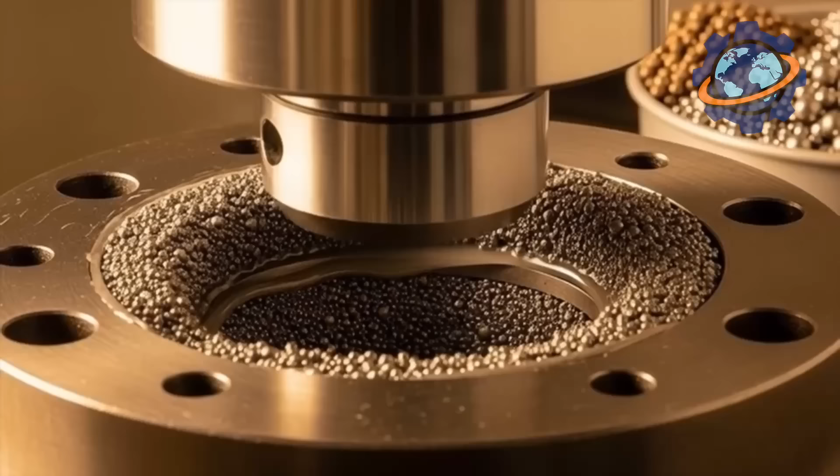Hold a 1-inch tungsten cube. It weighs nearly 1 pound, denser than gold, heavier than lead. Drop it and the floor dents, not the cube. This metal refuses to melt until 6,192 degrees, hotter than Earth's core, beyond temperatures where other metals vaporize.

Light bulb filaments, armor-piercing bullets, rocket nozzles: tungsten survives conditions that destroy everything else. Yet it starts as dull gray rock, looking worthless. How does brittle ore transform into metal that won't surrender? Why does one nation control 70% of global supply?

Stay with us. You'll witness industrial-scale mining reshaping mountains and discover tungsten's shocking secret. This indestructible metal is so brittle in pure form it shatters like glass.

The Dayu tungsten mine in Jiangxi, China dominates the landscape. An open pit 3 miles across, descending 800 feet into the earth. Giant haul trucks, each carrying 400 tons, crawl spiral roads looking like toys from the rim's edge.

This single mine produces 40,000 tons of tungsten concentrate annually, enough to manufacture 2 billion light bulbs. 70% of the world's tungsten comes from Chinese operations like this.

Watch the blast sequence. Drillers bore holes 50 feet deep in geometric patterns across the pit floor. Each hole gets packed with explosives, 200 pounds per hole, hundreds of holes per blast. The detonation ripples across the face in sequence, fracturing 10,000 tons of rock in 30 seconds.

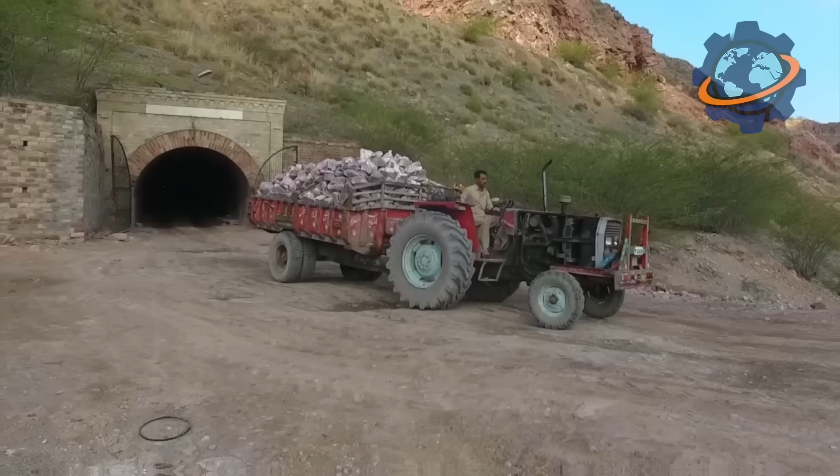Dust clouds billow 300 feet high, visible from orbit. What took nature millions of years to create, humans demolish in half a minute. The ore, wolframite and scheelite, contains just 0.5% tungsten. That means 99.5% is waste requiring removal.

Massive crushers reduce boulders to gravel. Ball mills grind further. Rotating drums containing steel balls pulverize ore to powder finer than flour. The grinding noise is deafening, continuous thunder as metal crushes rock.

Separation uses gravity and magnetism. Wolframite, being dense and magnetic, concentrates easily. Scheelite requires froth flotation. Chemicals make tungsten minerals hydrophobic, clinging to bubbles while waste sinks. The concentrate, now 15% tungsten, ships to processing plants.

China's dominance isn't accidental. They control reserves, processing knowledge, and critically tolerate environmental damage Western nations won't accept. Tailings ponds stretch miles, filled with chemical-laced sludge that'll remain toxic for centuries.

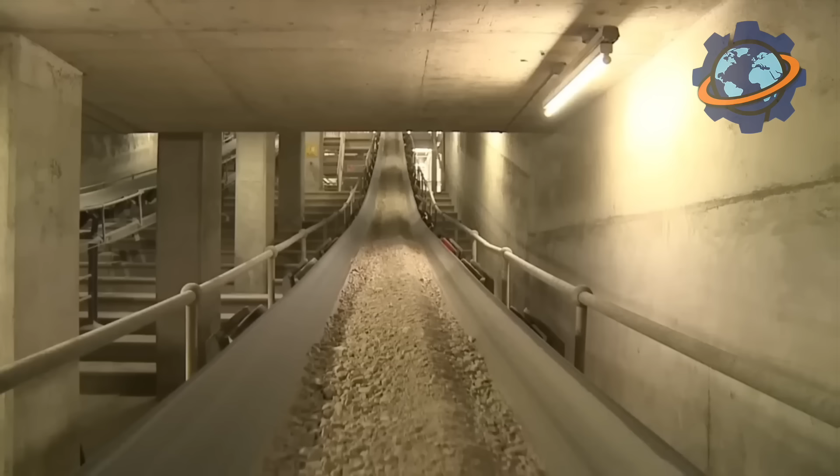Processing concentrate into pure tungsten trioxide requires acid digestion. The concentrate gets dissolved in hydrochloric or nitric acid, a violent chemical attack breaking molecular bonds. Tungsten dissolves while impurities precipitate out. The solution, now containing tungsten compounds, undergoes pH adjustment, causing yellow tungsten trioxide powder to crystallize.

This powder undergoes hydrogen reduction, the crucial transformation. Inside tube furnaces heated to 1,800 degrees, hydrogen gas flows over tungsten trioxide. The hydrogen strips oxygen atoms, leaving metallic tungsten powder.

But here's the challenge. Pure tungsten powder is useless. The particles don't bond. Press them together and they crumble. Tungsten's ultra-high melting point makes conventional melting impossible. No crucible survives the temperatures required. The solution? Powder metallurgy.

Powder metallurgy bypasses melting through sintering. Particles fuse below melting point under pressure and heat. Tungsten powder gets pressed into desired shapes using hydraulic presses generating 50,000 psi. The compacts, called green bodies, are fragile; handle them roughly and they disintegrate.

The green bodies enter sintering furnaces operating at 4,500 degrees in a hydrogen atmosphere. At these temperatures, tungsten atoms migrate across particle surfaces, welding together without liquefying. The process takes 12 hours. What emerges has transformed. The powder compact becomes solid metal with 99% density.

Dimensional changes are predictable but significant. Parts shrink 18% during sintering. Engineers must design oversized greens compensating for this shrinkage.

Pure tungsten remains problematic. It's brittle at room temperature, difficult to machine. The solution? Alloying. Adding 2% thorium or lanthanum dramatically improves workability. These elements prevent grain growth during sintering, creating a fine-grained structure that machines more easily.

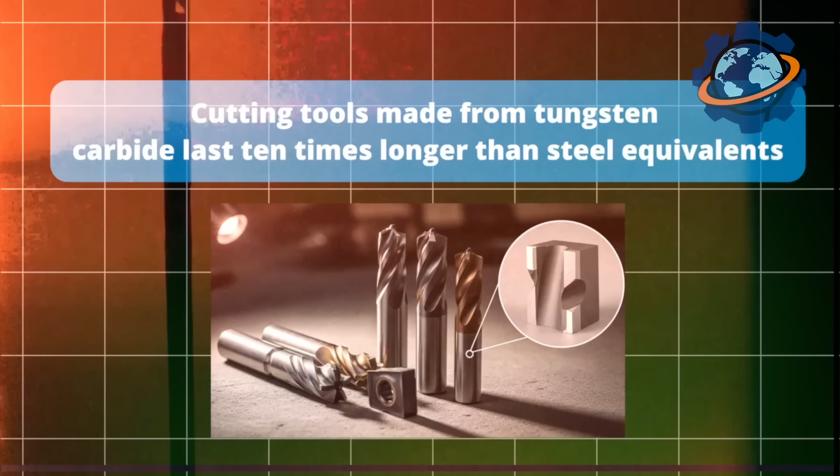The most common tungsten product worldwide is tungsten carbide, tungsten powder mixed with carbon, sintered together. Tungsten carbide achieves hardness second only to diamond. Cutting tools made from tungsten carbide last 10 times longer than steel equivalents. Mining drill bits, machining inserts, industrial dies: anywhere extreme wear occurs, tungsten carbide dominates.

The material cuts steel like butter but shatters under impact. Drop a tungsten carbide block on concrete and it explodes into fragments. The combination of extreme hardness and extreme brittleness defines tungsten's paradox.

Wire drawing demonstrates tungsten's remarkable properties. The sintered tungsten gets heated to 3,000 degrees and drawn through progressively smaller diamond dies. The wire diameter reduces from 1/4 inch to thousandths of an inch, thinner than human hair, for light bulb filaments. This drawing process work hardens tungsten, increasing strength.

Modern LED lights made tungsten obsolete for household illumination, but specialty applications remain. Electron microscopes, X-ray tubes, high-temperature furnace elements. Anywhere electricity must flow through extreme heat, tungsten wire delivers. The element's resistance increases with temperature, making it self-regulating. In light bulbs, the hot filament resists current flow, limiting power draw and preventing burnout from voltage spikes.

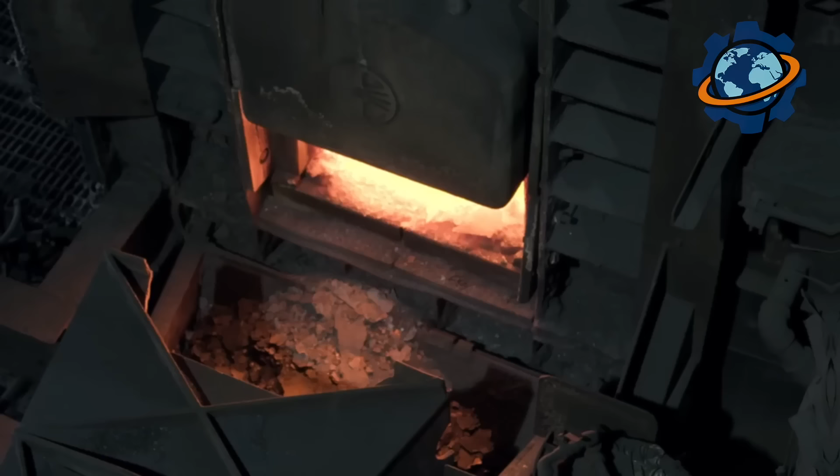The ethical controversy is intense. Depleted uranium performs similarly but raises radioactivity concerns. Tungsten offers equivalent performance without radiation, but mining's environmental cost is staggering. Each ton of tungsten requires processing 200 tons of ore, generating mountains of toxic waste. The metal that survives Earth's most extreme conditions is extracted through processes poisoning the planet.

Swedish chemist Carl Scheele identified tungsten oxide in 1781, studying the mineral scheelite. Spanish brothers Juan and Fausto Elhuyar isolated metallic tungsten 2 years later. The name derives from Swedish tung sten, heavy stone. For a century, tungsten remained a laboratory curiosity. Everything changed when Thomas Edison needed light bulb filaments in 1879. He initially used carbon, which burned out quickly. By 1904, manufacturers switched to tungsten, revolutionizing electric lighting.

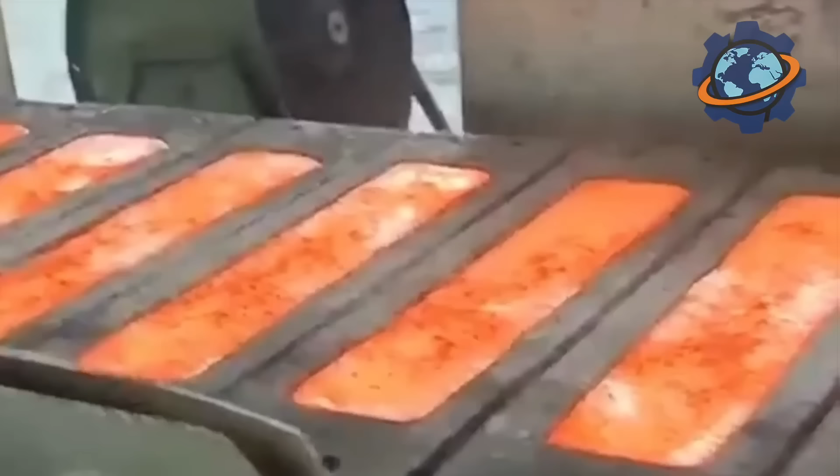World War I revealed tungsten's military value. High-speed steel cutting tools containing tungsten enabled mass production of weapons. Today's annual production exceeds 90,000 tons, with China dominating supply chains so completely that Western nations consider tungsten a strategic vulnerability. Carbon emissions remain problematic as tungsten production generates 8 tons of CO2 per ton of metal, primarily from energy-intensive processing. Recycling exists but remains limited. Only 30% of tungsten gets recycled, far below rates for aluminum or steel.

Here's the secret we promised. Tungsten's incredible strength comes from its weakness. Pure tungsten is brittle, shattering easily. But that brittleness stems from its crystal structure. Atoms packed so tightly that dislocation movement, the mechanism allowing metals to deform, essentially stops. This atomic rigidity creates the highest melting point, extreme hardness, and resistance to deformation. The metal survives temperatures melting steel because its atoms simply refuse to move. Adding trace elements creates enough flexibility for workability while maintaining strength.

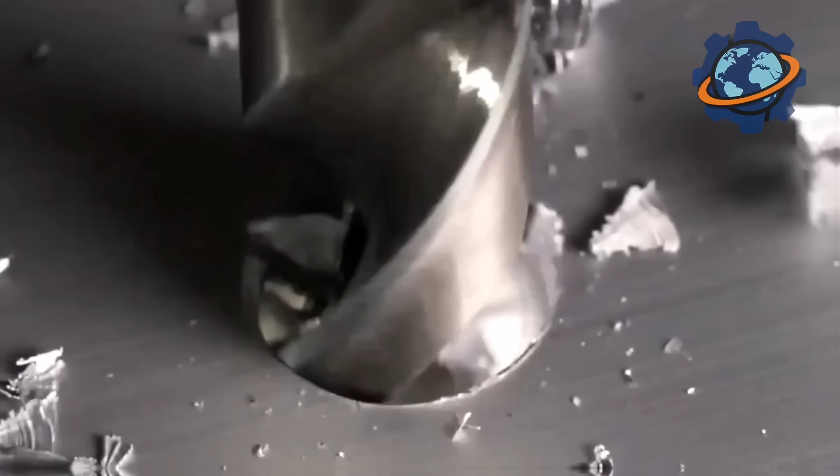From Chinese mountains to cutting edges worldwide, the transformation completes. We've mastered metal that defies conventional metallurgy, processing it through techniques developed when melting proved impossible. That drill bit cutting through rock, that filament glowing white-hot, that bullet piercing armor, all share tungsten's fundamental contradiction. The strongest metal is also the most fragile. The element that won't melt is useless without powder metallurgy. We've learned to work with nature's extremes by accepting, not fighting, inherent limitations. Tungsten doesn't compromise. Neither do the engineers who've learned to shape it.

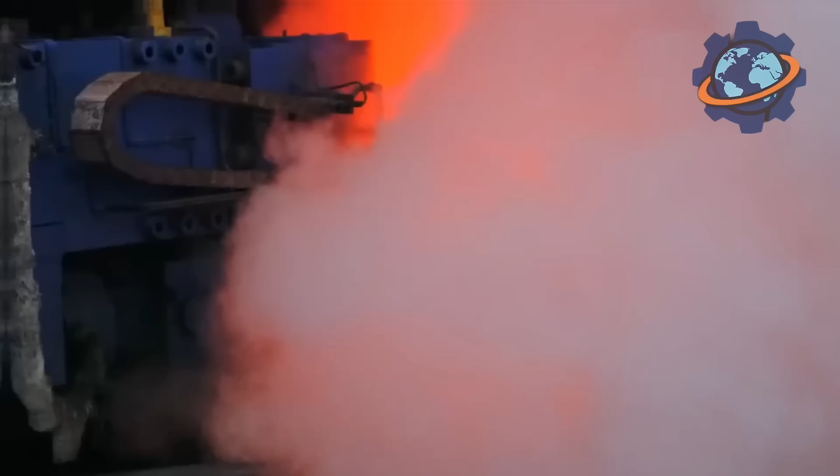Every year, hundreds of power units, bridges, and turbines are built worldwide. But there's one component almost nobody knows exists. How can a piece of metal over 50 feet in diameter be stronger than any welded structure? Why is it forged without a single seam, as if grown from a solid ingot? And how did this technology, created for nuclear reactors, suddenly start transforming wind energy, hydroelectric plants, and even the global heavy forgings market? Stick around till the end. I'll reveal the main secret of this giant ring that even many engineers don't know about.

To really get a sense of the scale here, picture a soccer field. The goal is over 23 feet wide. This ring's diameter, more than double that. You could easily fit multi-story buildings inside it, or a plane. And it's all one solid piece of stainless steel, not a single weld anywhere.

In the past, rings this size were made by welding together several large segments. Looked good, but those longitudinal seams always carried a hidden risk. Any micro crack, any welder's mistake, and during an earthquake or under long-term loads, that seam could become the weak point. Chinese metallurgists decided to go a different route. Don't glue it together, grow the ring from a single piece. They used a technique they call additive forging.

Here's how it works. Instead of trying to stretch a billet to the right size all at once, they forge it repeatedly in layers, gradually building up and rolling out the metal in the shape of a giant ring. Think of it like rolling out dough and folding it into a log multiple times to make it thick, even, and free of air pockets. Here, instead of dough, it's heated stainless steel and presses exerting thousands of tons of force.

First, they melt exceptionally high-grade steel with nickel, chromium, and molybdenum. These additives provide strength, ductility, and corrosion resistance, even in radioactive and high-temperature environments. The resulting ingot looks like a massive metal barrel. It's heated in furnaces where temperatures are many times higher than in a kitchen oven, then transferred to presses.

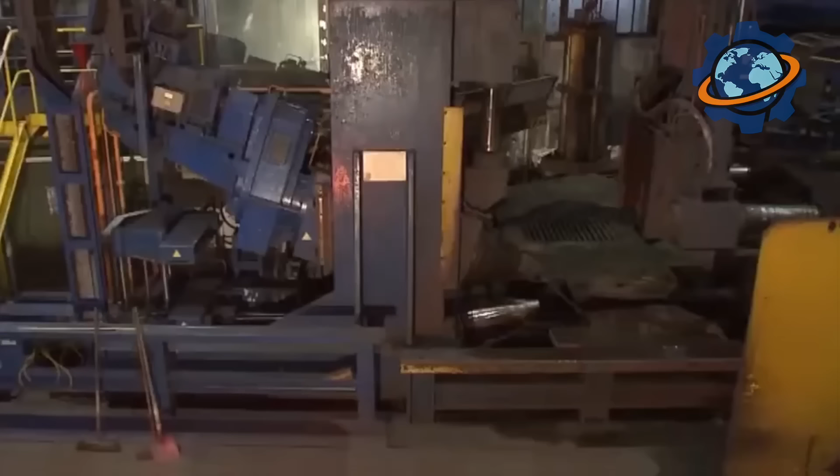The blank is first flattened, then pierced through, then rolled in a circle, each time rotating and hammering it so the structure becomes as uniform as possible. The incremental forging technique means the metal is constantly built up in the needed direction, while simultaneously being compacted, driving out voids and defects.

With each pass through the press, the ring grows in diameter, but its walls maintain the required thickness, and the steel's grain structure aligns. Engineers constantly monitor temperature, compression force, and deformation rate. If the metal cools too much, it becomes brittle and can crack. If it overheats, the structure flows and the steel loses strength.

So the entire operation is run like a complex recipe. Precise steps, holding times, checks at every stage. In the end, you have a solid ring without a single seam. This is critical for a nuclear reactor.

The support flange acts like a belt, holding together the vessel walls and all the internal guts, the reactor core, heat exchangers, internal structures. It bears not only 7,000 tons of weight, but also thermal deformations, vibrations, and possible seismic shocks.

Picture the reactor as a massive pressure cooker. This ring? It's the belt that can't budge, not even a micron. No weld seams means way less risk of cracks under cyclic loads, and it makes the whole thing tougher against earthquakes. Of course, forging isn't the end of the story.

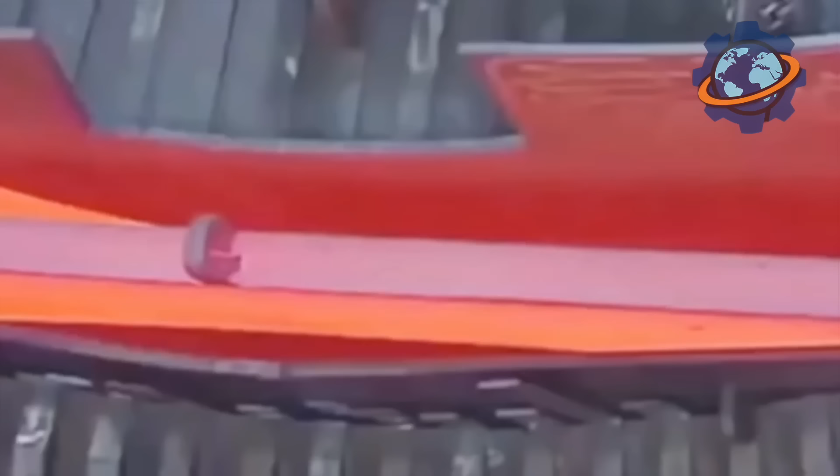The ring goes through heat treatment, heated and cooled on a precise schedule to lock in the steel's key properties: yield strength, impact toughness, resistance to creep at high temps.

Then come the endless checks: ultrasonic testing for hidden flaws, mechanical tests on samples sliced from machining allowances, hardness measurements around the whole perimeter. Only when engineers are confident the metal behaves identically at every single point does the part get cleared for duty in a nuclear unit.

What's really fascinating is that the breakthrough with this record-breaking ring didn't stay trapped in the nuclear club. The same idea of forging massive solid hoops started spreading to other industries. The hydro turbines at large hydroelectric plants have enormous ring-shaped components that hold the runners and guide vanes.

Wind turbine towers need powerful flanges that transfer loads from the blades through the nacelle to the steel column. The fewer welds in these critical parts, the better they handle vibrations and tough operating conditions. Additive forging technology makes it possible to produce large-diameter, solid rings for them that last longer and perform more reliably.

The world's most powerful open-die forging presses, including those at China Erzhong, reach 80,000 tons of force and can deform ingots weighing anywhere from several dozen to over 250 tons, which is exactly what opens the door to forging rings on this scale.

On a global scale, large-scale forgings for the energy sector come from a tight circle of suppliers. Facilities in Japan, China, France, and Russia, each with its own production lines for large reactors, generators, and turbine rotors. Demand for seamless rings isn't just growing in nuclear power.

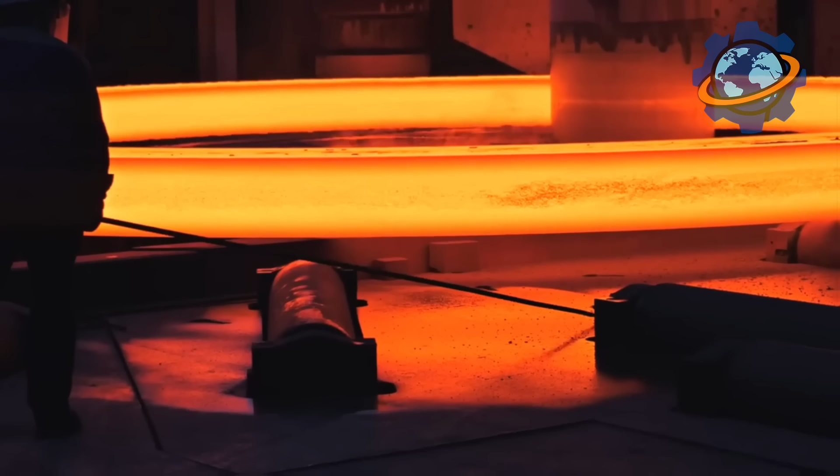The forged flange market for wind turbines was valued at roughly $1.5 billion in 2023 and could hit around $3 billion by 2032, with seamless ring forgings claiming a significant chunk of that pie. Offshore wind farms need massive flanges and rings that can handle punishing wind loads, salt water, and constant fatigue cycling. Here, seamless rings have a clear edge over welded ones, thanks to lower cracking and deformation risks.

Similar rings show up in hydropower too. Turbine bands, guide vanes, massive flanges for high-pressure pipelines. Anywhere a failed weld could spell disaster, manufacturers switch to giant one-piece forgings.

The story of that Chinese ring over 50 feet across, that's just the tip of the iceberg for the entire heavy forging industry. It shows just how far modern blacksmithing has come. Diameters over 50 feet, weights north of 330,000 pounds, design loads in the thousands of tons, and service lives measured in decades without replacement. And market data for power forgings and wind flanges hints that we'll see more and more of these record-breaking rings in nuclear, hydro, and wind energy every year.

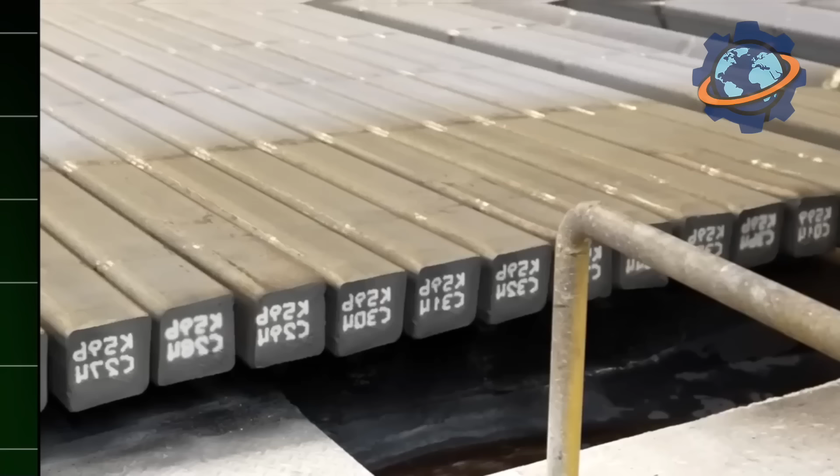That's more than all other metals combined. 95% of all metal used by civilization is iron and steel. Without iron, there'd be no skyscrapers, bridges, ships, cars, or trains. How do fiery rivers of molten metal at 3,600 degrees emerge from red ore in city-sized quarries?

You'll see explosions in quarries, blast furnaces as tall as 30-story buildings, converters where oxygen turns pig iron into steel in minutes, and rolling mills where 1,000-ton slabs get rolled into paper-thin sheets. Watch to the end. The finale shows why iron holds the world together. This is the story of the metal that built civilization.

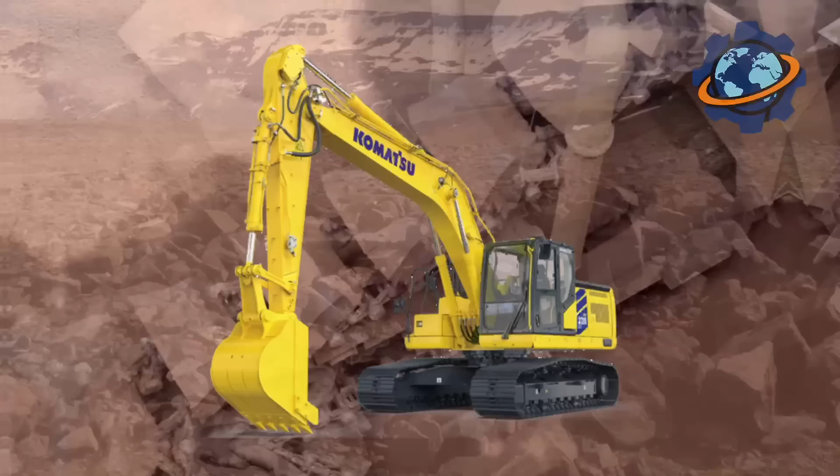The Lebedinsky quarry in Russia is one of the planet's largest iron ore quarries. Depth, nearly 2,000 feet. Width, 3 miles. From the edge, you can't see the bottom. A gigantic wound in the earth from which 100,000 tons of iron ore are extracted daily. Excavators as tall as 10-story buildings scoop rock with buckets holding 1,800 cubic feet. One bucket is like a small house.

Dump trucks with 360-ton capacity haul ore up the spiral road. Wheels taller than a person. But before loading the ore, it needs to be blasted. Drilling rigs create holes 65 feet deep. Tons of ammonium nitrate explosive are packed into these holes. The explosion? Earth trembles. A wall of rock tall as a skyscraper crashes down. A dust cloud rises 3,000 feet. After the dust settles, excavators begin work.

The ore is reddish-brown, sometimes almost black. Magnetite and hematite, iron oxides. Iron content ranges from 30 to 60%. The rest is waste rock. The ore goes to a processing plant. Massive cone crushers grind bus-sized chunks. The noise can be heard for miles. Ore gets crushed to fist size, then to gravel, then smaller.

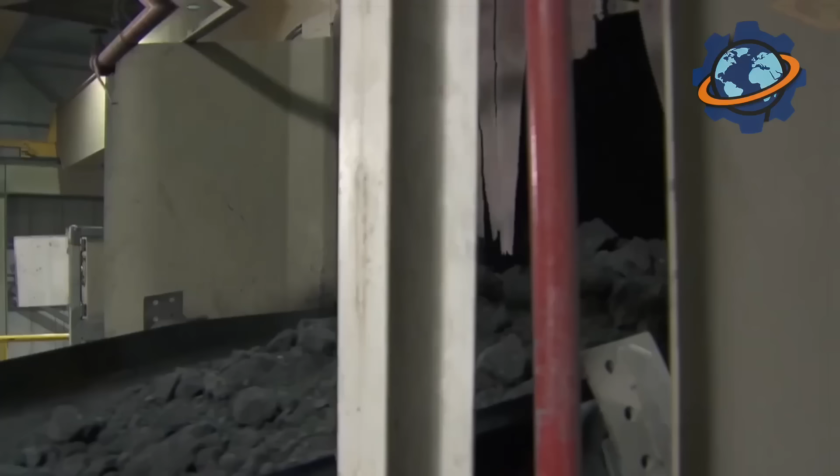It enters ball mills, steel drums 20 feet in diameter, 33 feet long. Inside are hundreds of tons of steel balls. The drum rotates, balls drop, grinding ore into fine powder. After 8 hours of grinding, you get reddish-brown dust. It's mixed with water, creating pulp, liquid slurry. This slurry passes through magnetic separators. Magnetite sticks to magnetic drums. Waste rock washes away. The concentrate contains 65 to 70% iron.

From this, they make pellets, granules the size of walnuts. Wet concentrate gets rolled into balls on special drums, then fired at 2,400 degrees Fahrenheit. Pellets harden, becoming rock solid. These pellets are raw material for blast furnaces. Each plant produces millions of tons of pellets yearly. They're loaded onto trains and shipped to steel mills.

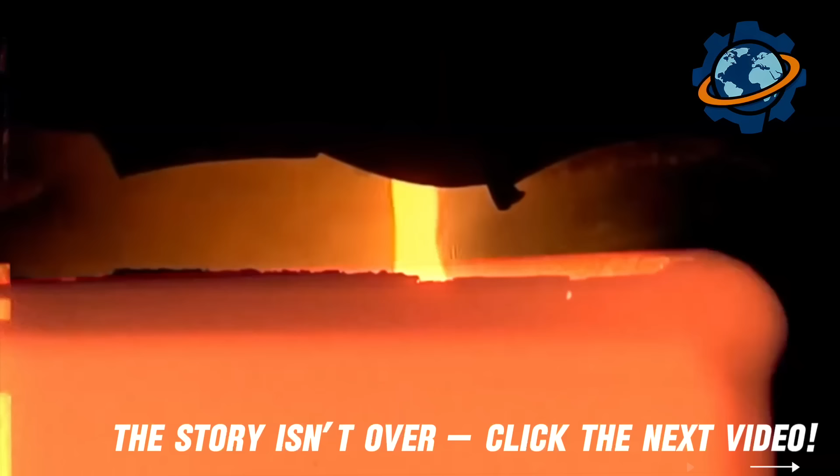A blast furnace is a steel tower 330 feet tall, 46 feet in diameter. 30 stories of pure metal and fire. Lined inside with 3-foot-thick fireproof brick. Internal volume, 176,000 cubic feet. Iron ore pellets, coke, and fluxes like limestone or dolomite are loaded from the top, in layers, like a layered cake. Several hundred tons at a time.

From below, through tuyères, openings in the walls, hot air is blown in. Air temperature, 2,200 degrees Fahrenheit. Pressure, 4 atmospheres. Coke ignites. Temperature in the furnace's lower section reaches 3,600 degrees Fahrenheit. Pellets slowly descend, heating up. Different reactions occur at different heights. First, moisture leaves the ore.

Then, at 930 degrees, iron oxide reduction begins. Carbon from coke strips away oxygen. At 1800 degrees, ore becomes spongy iron. At 2700 degrees, iron melts. Drops of molten metal flow down. At the furnace bottom, molten pig iron accumulates, an iron alloy with 4% carbon. Pig iron temperature at the furnace bottom is 2,700 degrees Fahrenheit.

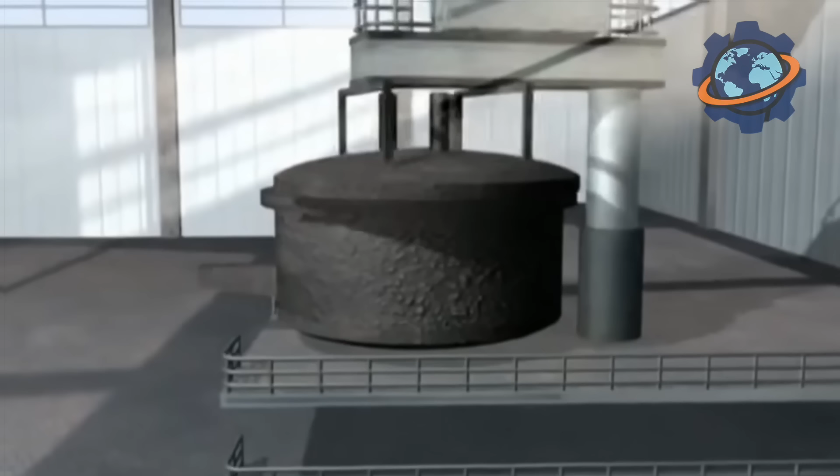It glows blindingly white with an orange tint. Pig iron is denser than slag, so it stays at the bottom. Slag, molten impurities and fluxes, floats on top. Every 4 hours, they open the tap hole, an opening in the furnace's sidewall. Pig iron tapping is a fire show. A stream of molten metal flows down channels. Sparks fly dozens of feet. The brightness requires dark glasses to watch.

Pig iron flows into massive ladles on railroad cars. One ladle holds 300 tons. It's a locomotive made of molten metal. The ladle gets covered to prevent cooling and shipped to the steelmaking shop. One blast furnace operates continuously for years. Stopping is catastrophic. Metal would solidify inside. The furnace produces 10,000 tons of pig iron daily. That's like 100 railroad cars. Major steel mills have 10 to 15 blast furnaces.

But pig iron isn't steel yet. It's brittle due to high carbon content. Steel is needed, an alloy with less than 2% carbon. Pig iron gets poured into a converter, a massive pear-shaped vessel 33 feet tall, lined with fireproof brick. It holds 350 tons of molten metal. The converter tilts, pig iron pours in, steel scrap is added for cooling. The converter returns to vertical position.

An oxygen lance, a tube 20 inches in diameter, lowers from above. Oxygen flow begins. A jet of pure oxygen at 150 pounds per square inch pressure strikes the molten metal. Violent reaction begins. Oxygen oxidizes carbon, silicon, manganese, impurities in pig iron. These exothermic reactions release enormous heat. Temperature rockets to 3,200 degrees Fahrenheit. Metal boils and churns.

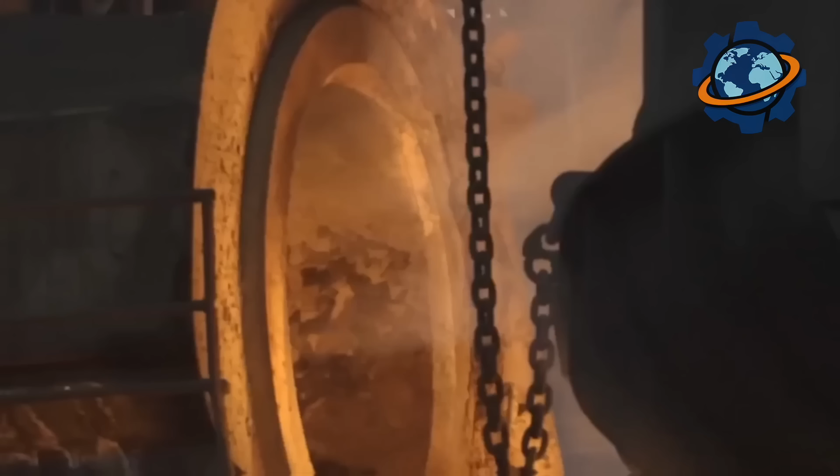Flame tongues several feet high shoot from the converter mouth. Sparks and molten drops fly everywhere. The blowing process takes 20 minutes. In this time, 350 tons of pig iron become steel. Carbon burns down to 1% or less.

The converter tilts, steel pours into a ladle. The molten metal glows blindingly white at 2,900 degrees Fahrenheit. Alloying elements get added to the ladle: manganese, chromium, nickel, molybdenum, depending on the steel grade needed. They mix it by blowing argon through. Then steel gets cast. There are two methods.

First, continuous casting. Molten metal pours into a crystallizer, a water-cooled copper mold. Below, a solidifying blank emerges, a slab 8 inches thick, 6.5 feet wide. It glows red, surface temperature around 1,800 degrees Fahrenheit. Gas cutters slice the slab into 33-foot lengths. One slab weighs 25 tons.

Second method, casting into ingot molds. Steel forms. This creates ingots up to 50 tons. These ingots and slabs are semi-finished products. They go to rolling mills. There begins the final transformation, turning thick blanks into thin sheets, rails, or beams.

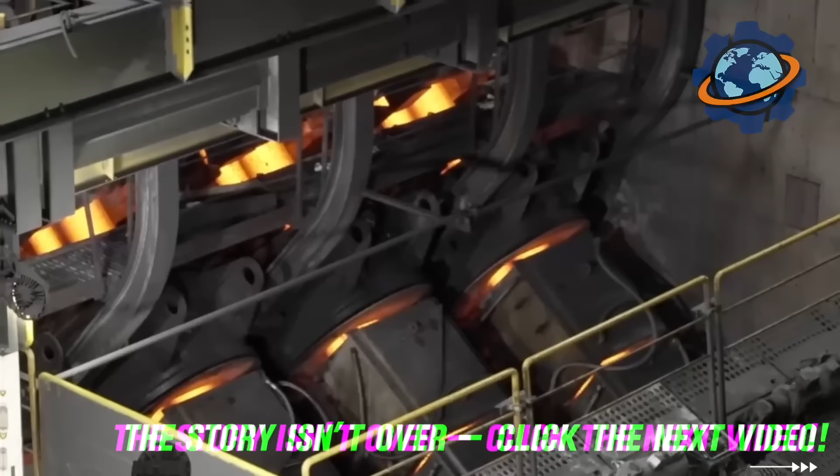Slabs heat in reheating furnaces to 2,200 degrees Fahrenheit, red hot. Then they go to the rolling mill. It's a line of dozens of rolls, steel cylinders 3 feet in diameter weighing dozens of tons. Rolls rotate toward each other. The red-hot slab enters between rolls. They squeeze and roll it. The slab gets thinner and longer.

It passes through the next pair of rolls, even thinner, dozens of times. An 8-inch thick slab becomes a sheet 1 to 2 millimeters thick. Length grows from 33 feet to over half a mile. Rolling speed on finishing mills reaches 50 miles per hour. Red-hot steel ribbon flies through the mill, sparks flying everywhere.

Temperature drops to 1,400 degrees Fahrenheit, metal darkens. The strip cools with water, winds into giant coils weighing 20 to 30 tons. This is hot-rolled steel, the foundation for car bodies, appliance housings, building structures.

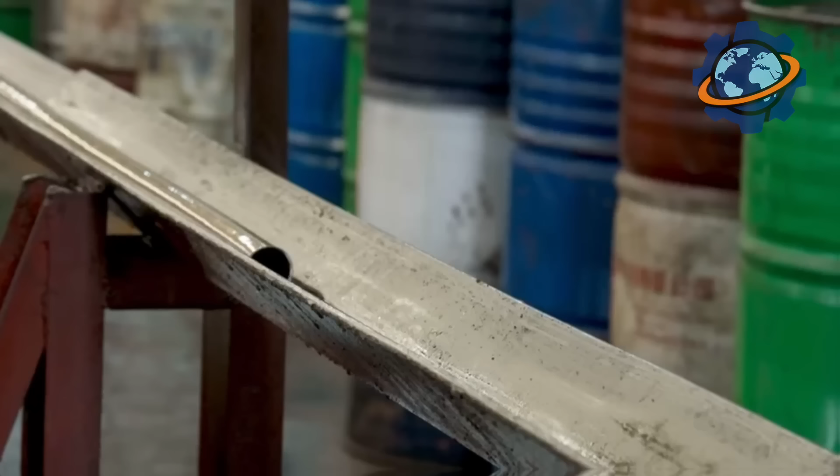Global steel production is 2 billion tons yearly. China produces over 1 billion tons, half the world's output. India, Japan, the US, Russia are other major producers. Steel is infrastructure's backbone. 95% of metal structures are steel, from skyscrapers to tin cans, from tankers to paper clips. Iron and steel are civilization's skeleton.

Iron is the oldest metal after copper and bronze. The Iron Age began 3,000 years ago. First, iron came from meteorites, ready-made metal fallen from the sky. Egyptian pharaoh Tutankhamun was buried with a meteorite iron dagger. Smelting iron from ore was learned by Hittites in Asia Minor around 1200 BC. They kept the secret for centuries, but technology spread.

Iron weapons were stronger than bronze. Iron plows worked soil better than wooden ones. Civilizations with iron defeated civilizations without iron. In medieval times, iron was made in small furnaces. The Industrial Revolution began with blast furnace invention in the 18th century. Early furnaces used charcoal. Later, they switched to coke from coal.

The 19th century brought the converter process, rapid pig iron to steel conversion. Bessemer, Martin, Thomas, names that changed the world. The 20th century was the steel century. Skyscrapers, bridges, ships, automobiles. Without steel, there'd be no modern world.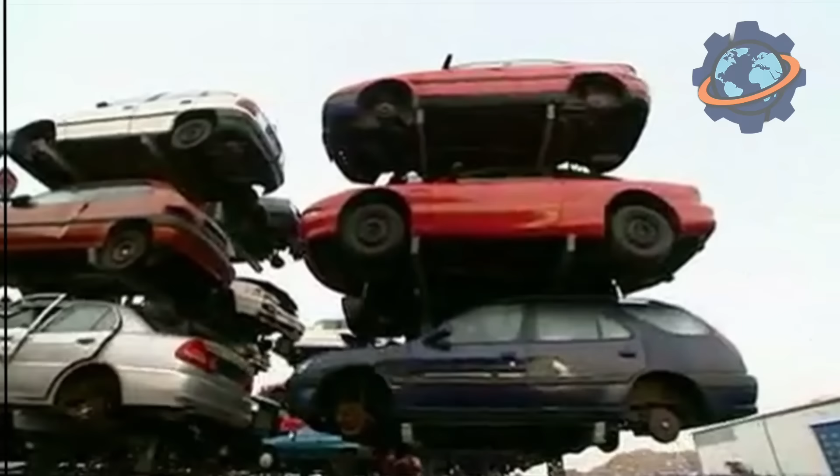And on the surface, iron rules. 95% of all metal is iron and steel. From nails to bridges, from paper clips to skyscrapers, iron holds the world together. Without iron, humanity would collapse back to the Stone Age. No machines, no electricity, no internet.

Everything's built on iron. From fiery rivers of molten pig iron in blast furnaces to steel beams holding up skyscrapers, iron is the foundation, the base, civilization's skeleton. Metal of the gods that became metal of the masses. The most abundant, most important, most irreplaceable. Iron, the metal that holds the planet together.

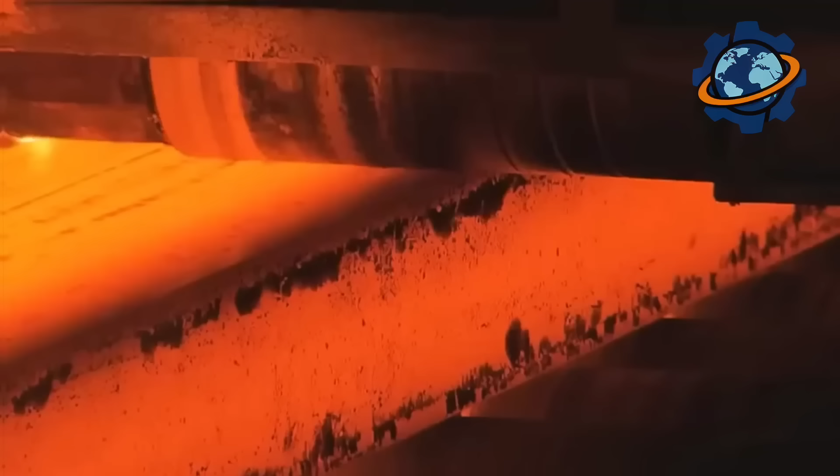Every year, humanity extracts over 2 billion tons of iron ore from Earth's crust. Picture this. More than half of our planet's entire weight is iron, most locked in the core, creating the magnetic field protecting all life. But here's what shocks engineers worldwide. We're standing on the most abundant metal in the universe, yet accessing it requires temperatures hotter than volcanic lava.

How does rust-colored rock transform into gleaming steel skyscrapers? How do ancient mountains become modern civilization? Stick around till the end. You'll discover why iron shaped human history more than gold ever did, and the jaw-dropping secret hiding inside every bridge, car, and building around you right now.

The story begins in Western Australia's Pilbara region, where iron mountains stretch across landscapes older than dinosaurs. Massive excavators, standing 8 stories tall, picture buildings that walk, tear into rust-red cliffs with bucket teeth weighing 12 tons each. These mechanical giants rip through rock layers formed 3 billion years ago when Earth's oceans first rusted.

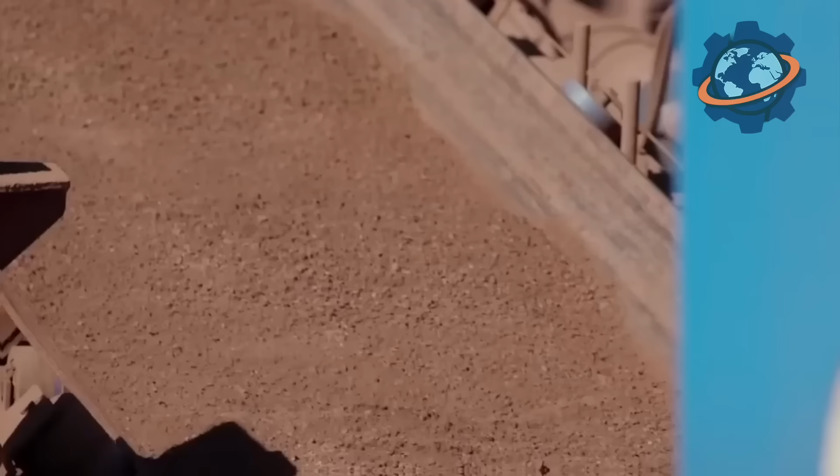With thunderous crashes echoing across 40-mile-wide craters, each excavator loads haul trucks carrying 400 tons per trip. That's the weight of 80 elephants moving at 40 miles per hour on tires taller than basketball hoops. Processing 30 million tons annually from single mines, enough iron ore to build 12 Golden Gate bridges every single day.

Next comes crushing, where house-sized jaw crushers, imagine dinosaur mouths made of hardened steel, pulverize boulders into gravel-sized chunks. With deafening roars splitting eardrums even through protection, these crushers generate forces exceeding 20,000 pounds per square inch. Clouds of red dust billowing upward create artificial sunsets visible from space satellites.

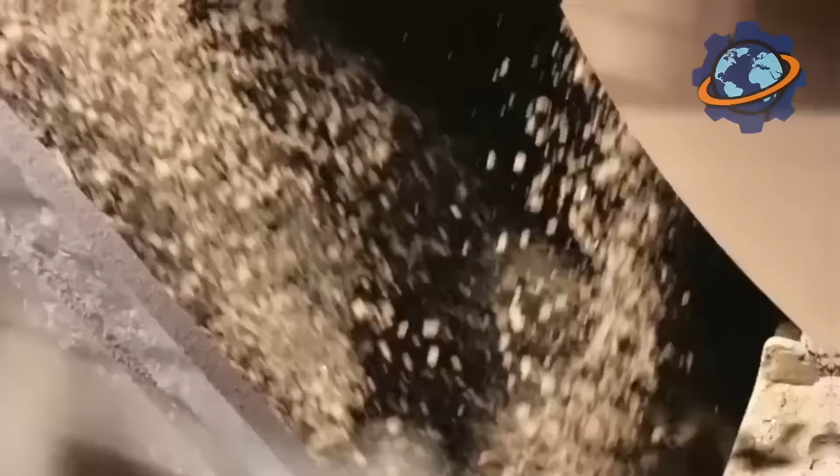Conveyor belts stretching 12 miles long, longer than Manhattan, transport crushed ore at 18 miles per hour. Workers riding inspection carts traverse distances requiring 25 minutes one way. That's enough belt to wrap around 300 football fields. Every hour, 50,000 tons flow through this system, weight equivalent to 5 Eiffel Towers moving continuously past checkpoints.

Giant grinding mills, standing 5 stories tall, with diameters matching Olympic swimming pool widths, pulverize rock into fine powder. Inside these rotating drums, 20-ton steel balls, each weighing more than shipping containers, tumble with ore, creating grinding thunder heard miles away. Operators monitor vibrations. Wrong frequencies mean catastrophic bearing failures, costing millions.

At rotation speeds creating gravitational forces triple normal Earth gravity, particles shrink to powder finer than talcum. Processing 8,000 tons hourly, that's filling semi-truck after semi-truck every 30 seconds. This powder, called concentrate, contains 65% iron. Magnetic separators then extract iron particles using forces strong enough to levitate railroad spikes, leaving waste rock behind.

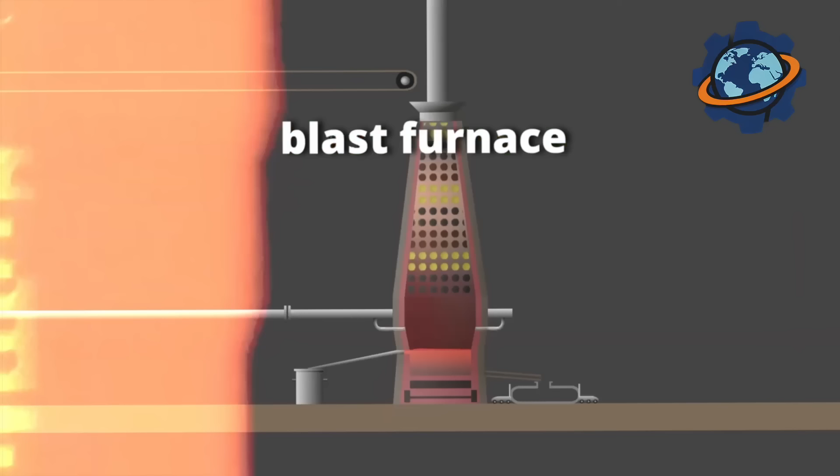Next comes the blast furnace, a towering inferno standing 30 stories high, its steel shell glowing dull orange even from outside. At internal temperatures exceeding 3,000 degrees Fahrenheit, hot enough to vaporize aluminum instantly, iron ore transforms into liquid metal. Picture Dante's Inferno engineered with precision. Measured charges of iron ore, coke, and limestone descend from the top, while superheated air blasts upward at 2,000 degrees from ring-shaped nozzles called tuyeres.

This creates a raging chemical storm, where carbon monoxide rips oxygen from iron oxide molecules. The reaction releases enough heat to melt granite. Every 3 minutes, sensors check 20 different parameters. Without precision, furnaces explode with force demolishing city blocks. The blast furnace operates continuously for 15 years, never cooling, never stopping, like Earth's core relocated to industrial facilities.

Inside this chemical reactor, materials descend through distinct zones. Upper regions preheat incoming ore. Middle zones drive off moisture and carbon dioxide. Lower depths become hell itself, where iron liquefies. At the hearth bottom, molten iron collects at 2,800 degrees Fahrenheit, dense as lead but flowing like water.

Every 4 hours, workers drill through clay-plugged tap holes. Liquid iron erupts in blinding white rivers, flowing through ceramic channels into railroad cars holding 300 tons each. This step is critical because timing determines metal purity. Tap too early, slag contaminates. Too late, furnace pressure ruptures containment walls.

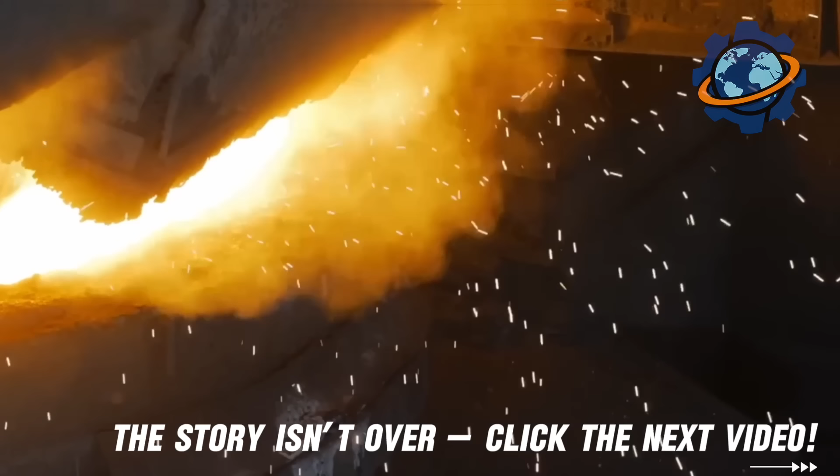The molten iron, called pig iron, contains 4% carbon, too brittle for construction. Picture glass that looks metallic. Drop pig iron from waist height, it shatters into fragments. Next comes the basic oxygen furnace, where pure oxygen blasted at supersonic speeds through 3-foot diameter lances burns away excess carbon in 17 minutes. Flames shooting 70 feet high, temperatures hitting 3,200 degrees, create hurricane-force winds inside steel vessels holding 350 tons of liquid metal.

Steel making requires precision rivaling brain surgery. Computer-controlled oxygen flow adjusts by milliseconds. Operators add exact amounts of manganese, silicon, chromium, elements changing steel properties dramatically. Too much carbon, steel cracks in winter cold. Too little, metal bends under load.

Picture this: alloying elements get injected via submerged lances. Electromagnetic stirring, invisible but powerful, homogenizes composition. Samples extracted every 3 minutes get analyzed via spectrometers, determining chemistry within seconds. Modern furnaces achieve carbon content accuracy to 0.01%, the difference between a skyscraper standing or collapsing.

After refining, liquid steel flows into continuous casting machines producing slabs 30 feet long, weighing 25 tons at rates of 1 slab every 90 seconds. This wasn't always so advanced. Back in ancient Anatolia around 1300 BC, Hittite metallurgists discovered heating iron ore with charcoal produced workable metal. That breakthrough, accidental furnace conditions reaching iron's melting point, changed human civilization forever.

Suddenly, steel costs dropped 90%. This single invention built modern cities. Skyscrapers, bridges, railroads exploded across continents. Today, global steel production exceeds 1.9 billion tons annually. That's enough to build 75,000 Eiffel Towers yearly, or manufacture 43 million automobiles, or construct bridges connecting every coastline on Earth.

Carbon emissions drop by 62% when using recycled steel versus virgin ore, equivalent to removing 12 million cars annually. Industry saves over $80 billion yearly through scrap recycling. Processing costs drop 43% because melting scrap requires 1/3 the energy of blast furnaces.

So here's the secret promised. Every ton of steel you see, bridges, buildings, cars, will be recycled indefinitely. Unlike plastic decomposing into microparticles or paper pulping into mush, steel never degrades. Magnetic separation extracts it perfectly from demolished structures.

That girder in your office building might contain steel from 1930s locomotives. Your car's frame could include battleship armor from World War II. Nothing disappears. Metal merely transforms, reborn eternally. From ancient mountains to modern marvels, the cycle completes.

Iron, humanity's most essential metal, circulates through civilization like blood through veins. We're not consuming Earth's iron, we're borrowing it, briefly, before passing it forward to futures we'll never see.

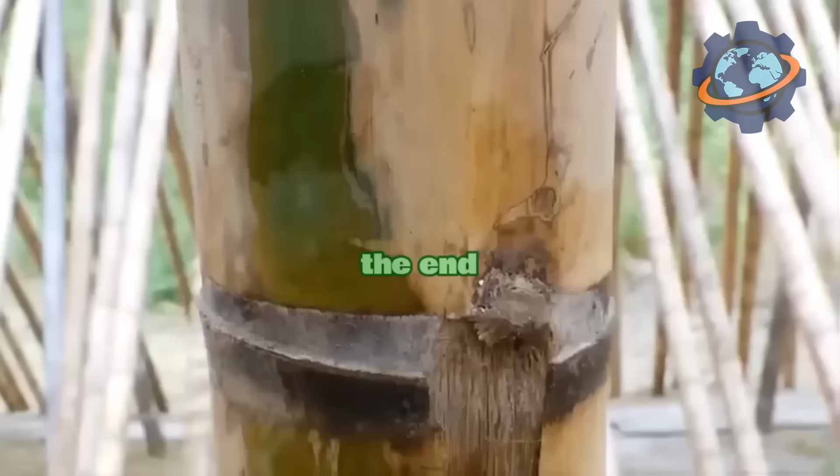In this video, we'll show you how giant green stalks travel from plantations to ultra-durable flooring and delicate fabric. And if you watch until the end, you'll learn one shocking fact that will change your perception of the future of ecology.

It all begins on vast bamboo plantations, covering millions of acres around the world. These are not chaotic thickets, but carefully managed farms. Unlike forests, bamboo does not require replanting. When one stalk, or culm, is cut, its extensive root system, called a rhizome, immediately sends up new shoots. This makes it one of the most sustainable resources on the planet.

One plantation can yield harvests for decades without harming the soil. Moreover, a bamboo forest absorbs 35% more carbon dioxide and produces 35% more oxygen than an equivalent area of trees. Harvesters, armed with simple machetes or handsaws, selectively cut only mature stalks, whose age can be easily determined by color and texture. Young shoots are left to grow further, ensuring the continuity of the cycle.

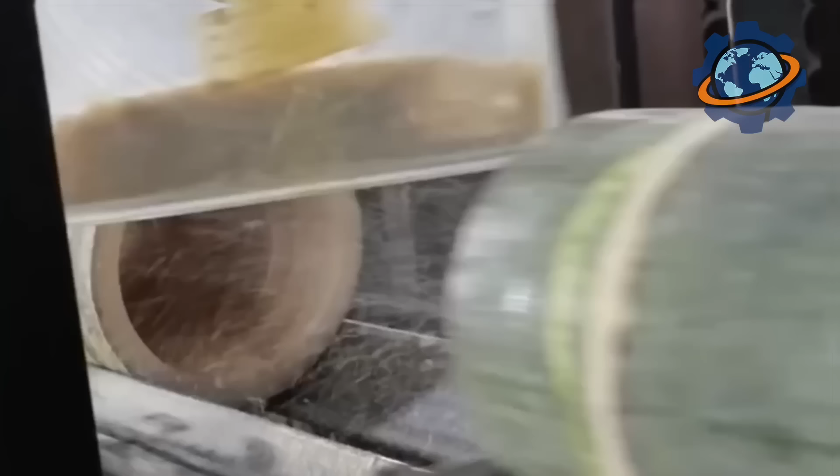One such mature stalk can reach 60 feet in height and weigh over 100 pounds, making its transportation from the plantation to the primary processing plant a complex logistical task. When these green towers arrive for processing, their radical transformation begins. First, the long stalks are cut into manageable sections. Then, they are fed into a special machine that, with a deafening crack, splits the round sections into long strips.

The next step is to remove the outer green skin and inner nodes, leaving clean, light bamboo planks. But inside these planks still lurks an enemy of durability: starch and sugar, which are a favorite food for insects and mold. To get rid of them, the planks are submerged in huge vats of boiling water, or a hydrogen peroxide solution, for several hours. This hot bath not only sterilizes the bamboo, but also washes out all the nutrients.

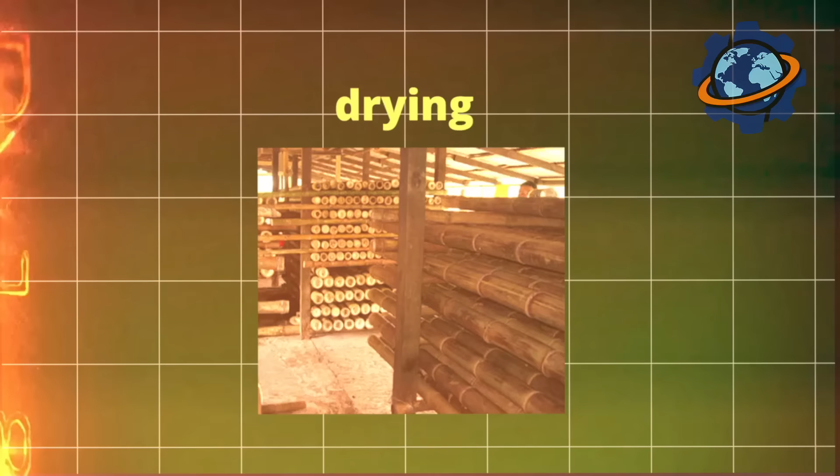After this, the planks are sent for drying. Some producers dry them in the open air, but for industrial scales, they are loaded into giant kiln dryers, where they spend several days until their moisture level drops from 50% to an ideal 8 or 10%. This stage is critically important, as any residual moisture can lead to warping and cracking of the finished product.

But the journey from a 60-foot pole to a smooth floorboard requires even more impressive engineering. The dried planks pass through milling machines that give them a perfectly rectangular shape. Then begins a process similar to making industrial lasagna. To create horizontal flooring, the planks are laid in a single layer and glued under pressure. For vertical flooring, the planks are placed on their edge and pressed from the side, creating a denser pattern. But the real marvel is the strand woven technology.

Here, the bamboo planks are not just glued together, but completely shredded into long fibers, mixed with an environmentally friendly resin, and loaded into huge steel presses. Under infernal pressure, reaching 3,000 pounds per square inch, and high temperature, this mass transforms into an extremely dense, monolithic block. The hardness of such flooring on the Janka scale can exceed 5,000 units, making it more than 3 times harder than oak, and more resistant to scratches and dents than most traditional wood species.

However, hardness is only one of bamboo's facets. Its other superpower is the ability to transform into something incredibly soft and silky. The process of creating bamboo fabric is a true industrial alchemy. The most common method, known as the viscose process, begins with grinding the bamboo raw material into a cellulose pulp.

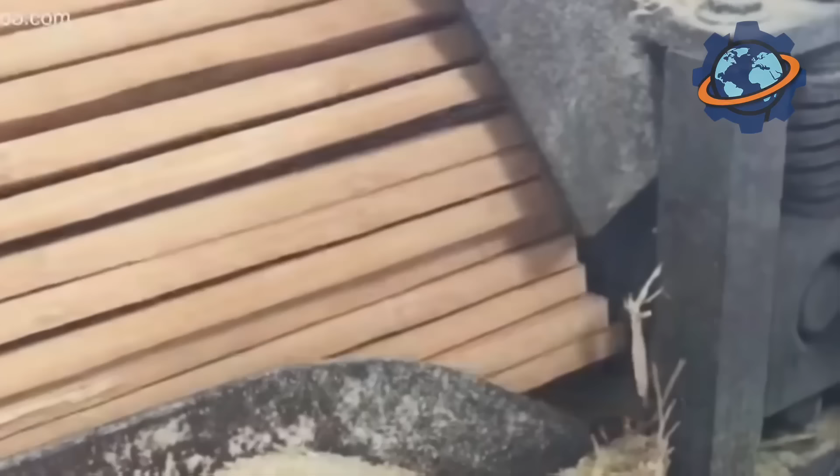This pulp is then submerged in a sodium hydroxide solution and then carbon disulfide, which turns it into a thick, viscous liquid. This liquid, resembling honey, is forced under pressure through the finest holes of a metal plate called a spinneret. Imagine a microscopic shower. Emerging from the holes, the thin streams enter a bath of sulfuric acid, where they instantly solidify, turning into endlessly long fibers. These fibers are then washed, bleached, dried, and twisted into yarn, from which fabric is woven.

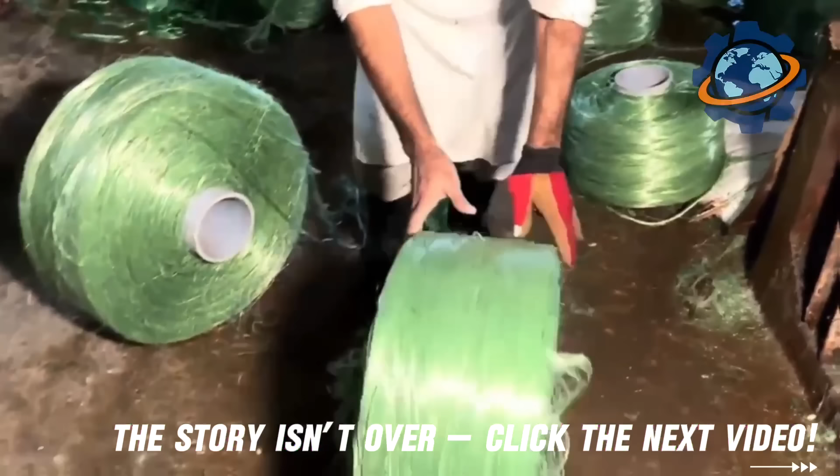Despite the complex chemical process, the final product is biodegradable and has unique properties. It is extremely soft, hypoallergenic, has natural antibacterial properties, and breathes wonderfully, making it ideal for clothing and bedding. The global bamboo market is colossal and is projected to exceed $100 billion in the coming years. Annually, over 30 million tons of bamboo are harvested worldwide, and this figure is only growing.

From kitchen cutting boards and toothbrushes to construction scaffolding capable of supporting the weight of concrete and elements in premium class cars, this giant grass demonstrates its versatility. It is a testament to how nature, multiplied by human ingenuity, can offer sustainable, strong, and beautiful solutions for countless tasks, turning a fast-growing straw into the gold of the modern world.

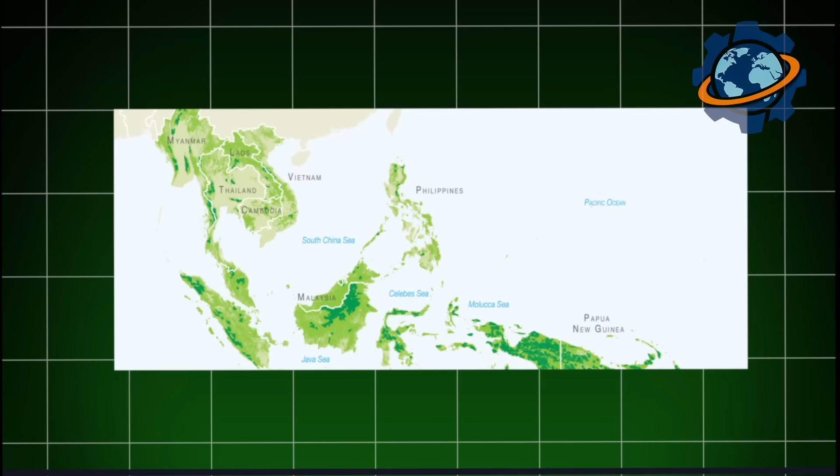Bamboo grows both in the wild and on specially created plantations. Its natural habitat mainly covers tropical and subtropical regions of Asia, where it is an integral part of local ecosystems. At the same time, thanks to its unique properties and wide range of applications, bamboo is actively cultivated on plantations around the world. It is cultivated for the production of building materials, textiles, paper, interior items, and as a source of biomass.

In the wild, there are over 1,000 species of bamboo. It is a perennial evergreen plant belonging to the grass family. Bamboo is known for its extremely fast growth. Some species can grow several tens of centimeters per day. Bamboo blooms very rarely, and after flowering and fruiting, the plant usually dies. Growing bamboo requires certain knowledge and care, including proper planting, regular watering, and choosing the right variety for specific climatic conditions. There are even ornamental types of bamboo that are grown in gardens and at home.

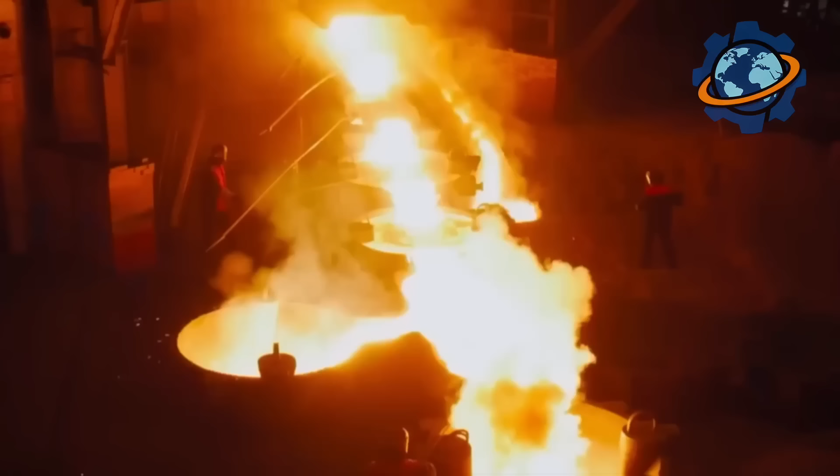Imagine a metal that's lighter than steel, stronger than aluminium, and can withstand temperatures at which other materials simply burn up. A metal used to build aircraft that conquer space and implants that serve people for a lifetime. Sounds like science fiction? But this is titanium, one of the most mysterious metals on Earth. It starts with tiny grains of ilmenite and rutile and ends up as parts for supersonic jets and spacecraft.

But few people know, behind the gleam of titanium lies a manufacturing secret so dangerous and energy intensive that it's rarely spoken of. If you watch till the end, you'll learn something that will forever change your perception of this metal.

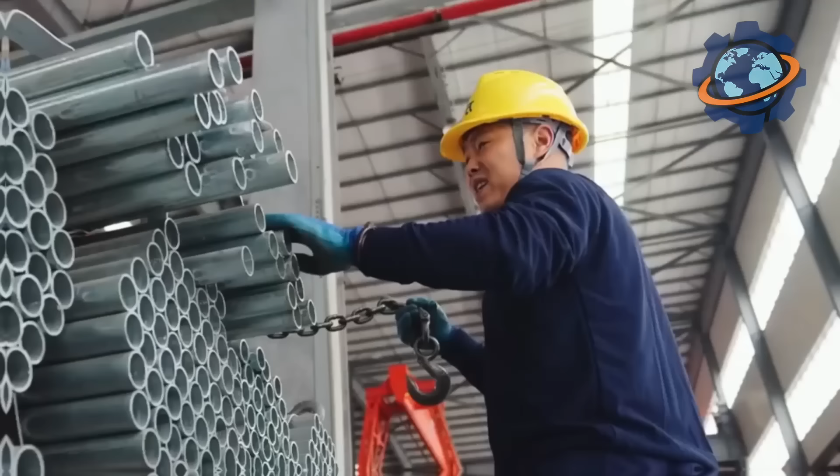The story of titanium production begins in the late 18th century when, in 1791, a British clergyman and amateur mineralogist named William Gregor discovered a new metal in the mineral ilmenite, which is now the main source of titanium. Initially, this metal was called menachanite, but later, in 1795, the German chemist Martin Klaproth rediscovered the element in the mineral rutile and named it titanium, in honor of the mythical Titans, giants of ancient Greek mythology.

However, the pure metal was first successfully isolated only in 1825 by the Swedish chemist Berzelius, though at that time it was contaminated with impurities and practically unsuitable for industrial use. The first attempts at industrial production of titanium began only in the 20th century.

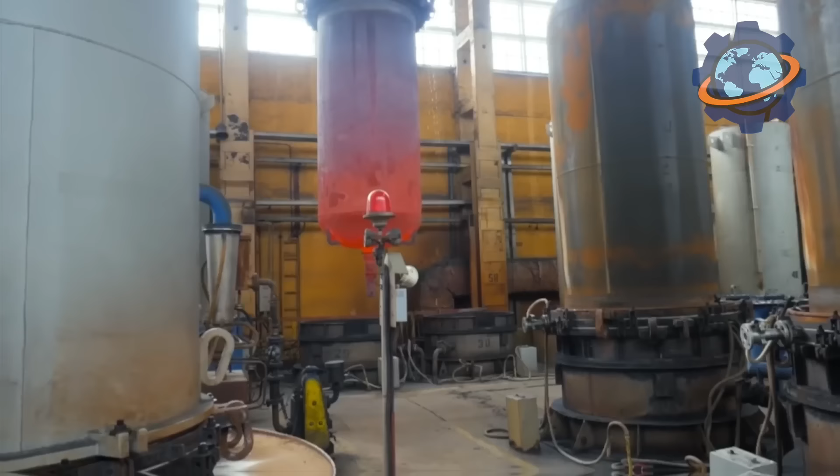In 1910, the American chemist Matthew Hunter obtained a small amount of pure titanium, and the real breakthrough came in 1925 when Dutch scientists Van Arkel and de Boer developed a method for producing high-purity titanium, paving the way for its widespread application. From the mid-20th century, titanium production developed intensively, especially in the USA, where the metal became indispensable in aviation, the space industry, and military applications.

The production of titanium starts with the mining of titanium-bearing raw materials, mainly the minerals ilmenite and rutile, which contain titanium oxides. These ores are found in placer or lode deposits and are widespread across the globe, particularly in Australia, Canada, China, Norway, and South Africa. After mining, the ore undergoes a complex multi-stage processing.

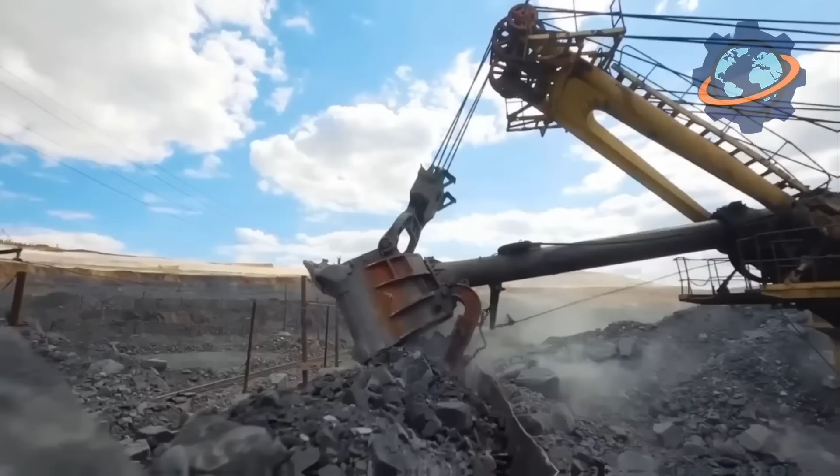First, it is enriched, separating the titanium minerals from the waste rock to obtain ilmenite or rutile concentrates. Then, the concentrates are subjected to chlorination, which results in the formation of titanium tetrachloride, a volatile substance that is purified by distillation. This process allows for the removal of impurities and the production of a high-purity intermediate product.

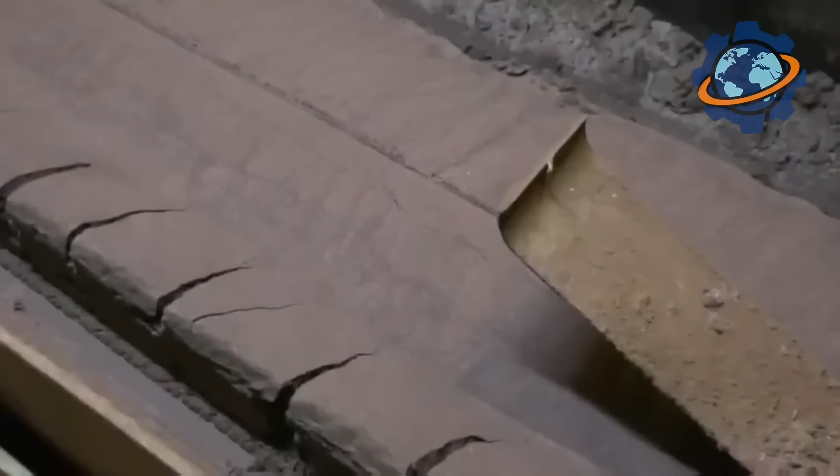Next, the titanium tetrachloride is reduced with magnesium or sodium in special reactors at high temperatures in an inert atmosphere, producing titanium sponge, a porous metallic powder. This titanium sponge is then pressed, melted, and cast to obtain ingots or billets for further processing. The production of titanium is energy-intensive and expensive due to the complexity of the technological processes and the need to work in high-purity conditions.

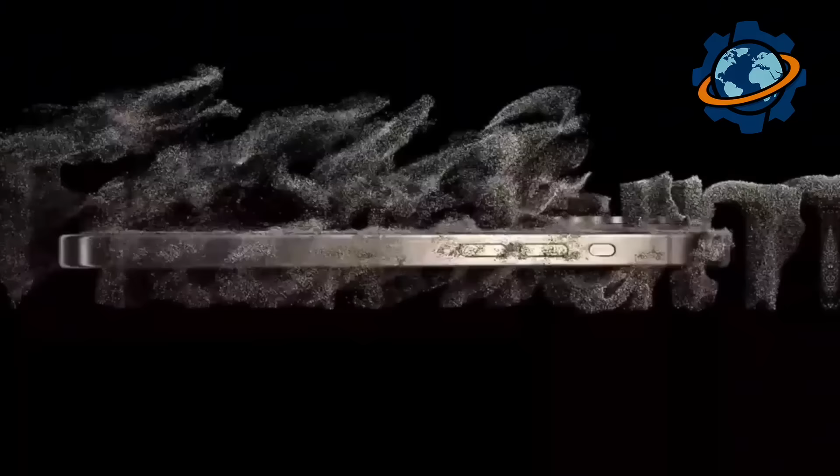The main industrial method for producing titanium is the Kroll process, which remains the global standard. It involves the chlorination of titanium ore, purification of titanium tetrachloride, and its reduction with a metal, allowing for the production of high-quality metal for aviation, space technology, medicine, and other industries. Thus, titanium production begins with the mining of ilmenite and rutile, goes through complex chemical reactions and physical processing to transform natural minerals into a high-tech metal that combines lightness, strength, and corrosion resistance.

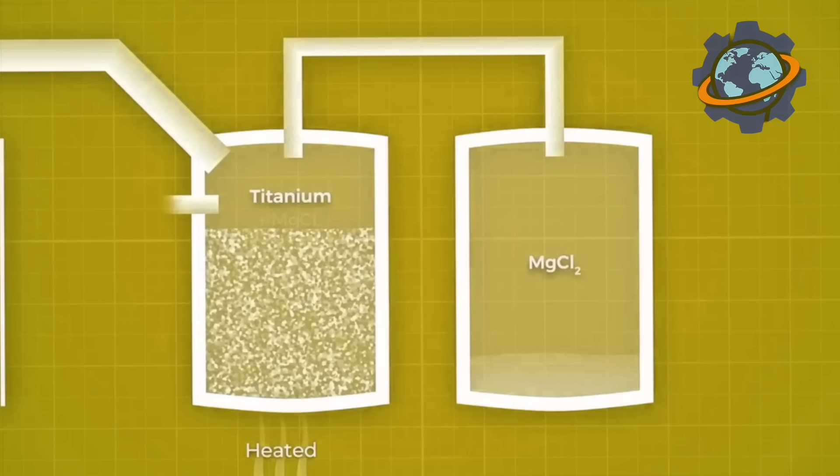The initial stages of titanium production are based on a complex, multi-step technological process that begins with the extraction and preparation of titanium-bearing raw materials, mainly ilmenite and rutile. These minerals contain titanium oxides, which must be converted into chemically pure titanium tetrachloride. To do this, the titanium ore concentrates are chlorinated in fluidized bed reactors at a temperature of 1,800 degrees Fahrenheit, where carbon and chlorine gas react with the raw material to form titanium tetrachloride and carbon monoxide. This tetrachloride contains impurities of other metals, which are removed by distillation to obtain high-purity technical titanium tetrachloride.

The next key stage is the reduction of titanium tetrachloride to metallic titanium. The most common industrial method is the Kroll process, in which titanium tetrachloride reacts with magnesium in a vacuum chamber at high temperature. The result is titanium sponge, a porous metallic powder containing impurities of magnesium and magnesium chlorides. This reaction mass is subjected to vacuum distillation to remove impurities, after which the titanium sponge is pressed and remelted into solid ingots or slabs.

The resulting titanium ingots are then used to produce alloys, rolled products, sheets, and complex parts. The entire process requires strict control of purity, temperature regimes, and safety, as titanium actively reacts with oxygen and nitrogen when heated. Just look at how incredible it is.

A porous, light, and seemingly fluffy mass of metal. This is titanium sponge. It looks nothing like a regular metal bar, but more like a piece of metallic sponge or foam, only made of titanium. But this fluffy material is the first step towards creating strong and reliable titanium ingots, which are then used in aviation, medicine, and other high-tech industries.

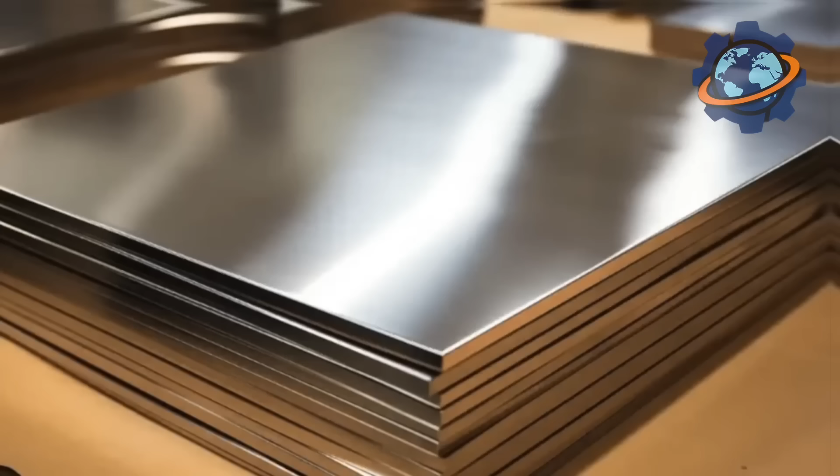First and foremost, titanium ingots can be used to create titanium alloys, mixtures of titanium with other metals that enhance its properties. To obtain an alloy, alloying elements are added to the molten titanium, most often aluminium, vanadium, molybdenum, iron, or niobium. These additives change the metal's structure, increasing its strength, heat resistance, corrosion resistance, and improving its workability.

The production of alloys usually takes place in vacuum arc furnaces, where the metal is melted at high temperatures in a protective atmosphere to avoid oxidation. To achieve a homogeneous composition, the alloy is remelted several times, after which it is cooled and prepared for further processing. The next stage is rolling.

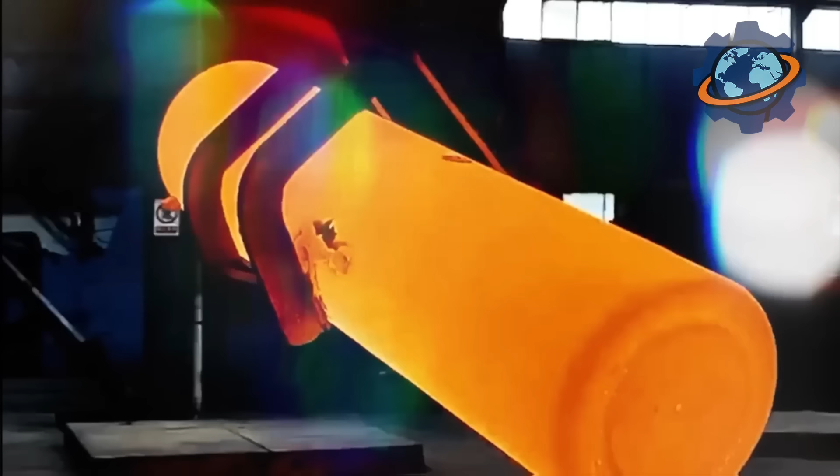Ingots or slabs of titanium and titanium alloys are heated to a certain temperature to make the metal more malleable and are passed through special rollers. Rolling allows for reducing the metal's thickness, giving it the desired shape and size, as well as improving its structure and mechanical properties. The result is various types of rolled products: strips, ribbons, wire, and bars. Rolling can be hot or cold, depending on the requirements for the final product.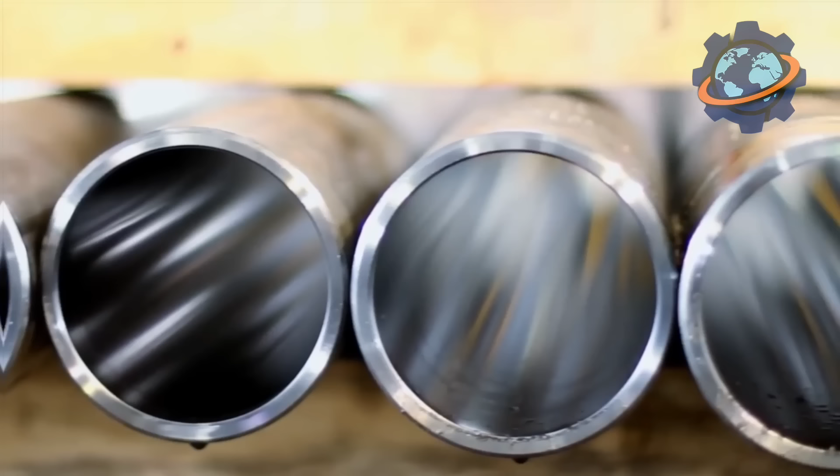From these rolled products, sheet metal is made, thin, flat blanks that are widely used in construction, aviation, medicine, and other industries. Titanium sheets are distinguished by their high strength and corrosion resistance, and are also easily subjected to further processing, cutting, bending, and stamping. The production of sheets requires precise control of thickness and surface quality, so after rolling, they are often subjected to additional processing, such as polishing or anodizing.

To create complex parts, various methods of processing titanium and its alloys are used. These can include mechanical milling, turning, grinding, as well as modern technologies such as additive manufacturing using laser powder bed fusion.

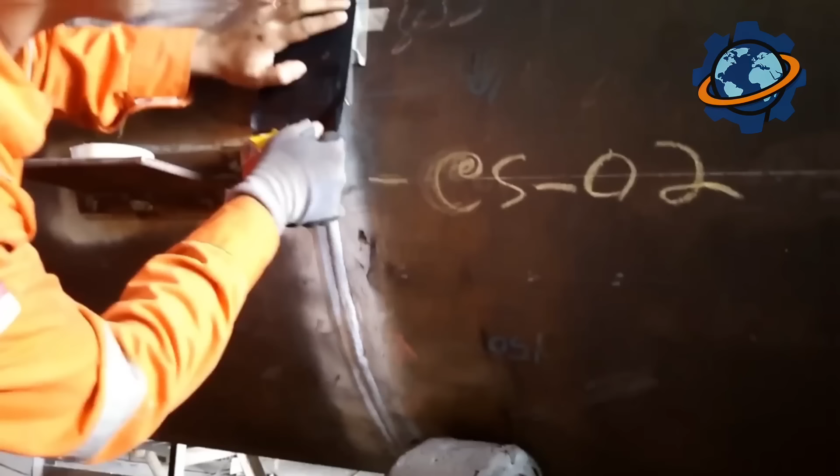Additive technologies allow for the creation of parts with complex geometries that are impossible to produce with traditional methods. This is especially important for the aviation and medical industries, where lightweight, strong, and precise components are required. Furthermore, to enhance their performance characteristics, titanium products can undergo heat treatment, annealing, quenching, or aging. These processes change the internal structure of the metal, improving its strength, hardness, and fatigue resistance.

In aviation, titanium is used for 15% of the weight of a modern passenger aircraft, significantly reducing its overall weight and increasing fuel efficiency. In the medical field, about 70% of implants, such as artificial joints and dental prostheses, are made from titanium or its alloys due to their biocompatibility and durability.

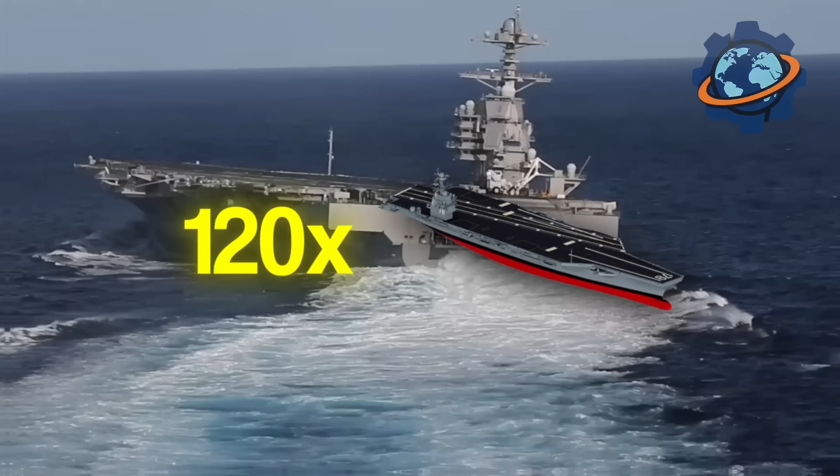Every year, millions of tons of chemicals are produced worldwide, but one of them, chlorine, is truly staggering in scale. In the United States, over 12 million tons of this gas are made annually. That's the same weight as 120 Gerald R. Ford aircraft carriers, the heaviest ships in the world. But where does this dangerous, yet vital substance come from?

It all starts not in a lab, but in underground deposits of common salt. From there, it involves electricity, membranes, and an entire industry that consumes more power than entire American states. And if you watch till the end, you'll discover the secret that chlorine hides behind its sharp smell.

The United States is one of the world's largest producers of chlorine. Each year, plants in the country produce over 12 million tons of the gas. This number is just hard to wrap your head around. Imagine the weight of the aircraft carrier, the Gerald R. Ford, the heaviest warship in the world. It's about 100,000 tons. This means that in a year, American industry produces as much chlorine as 120 of those aircraft carriers weigh. This enormous quantity makes chlorine one of the top 10 most produced chemicals in the country.

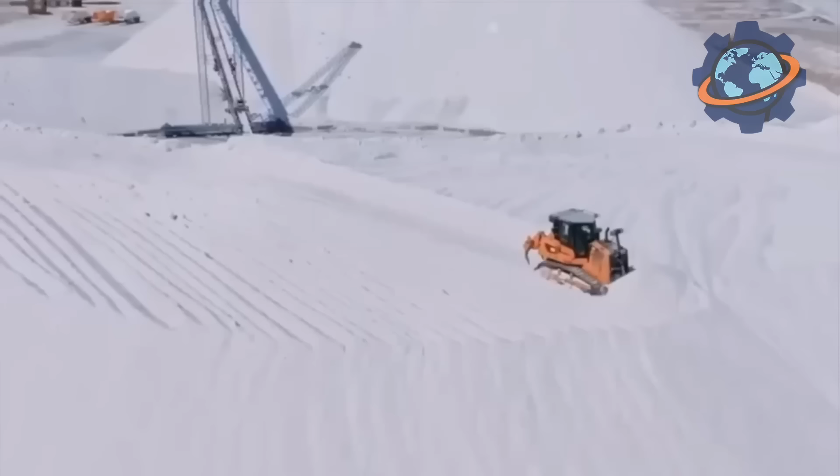It all begins not in a laboratory, but deep underground. The main ingredient for our recipe is common rock salt, or sodium chloride. But it doesn't arrive at the plant in salt shakers. It's either mined in the form of huge chunks, or, far more efficiently, pumped out from under the ground.

Water is pumped into deep underground salt deposits. The water dissolves the salt, creating a saturated salt solution called brine. And it's this concentrated, salty as tears solution that is our raw material. But it's still impure. It's full of contaminants, calcium, magnesium, and other minerals that can clog up our expensive equipment.

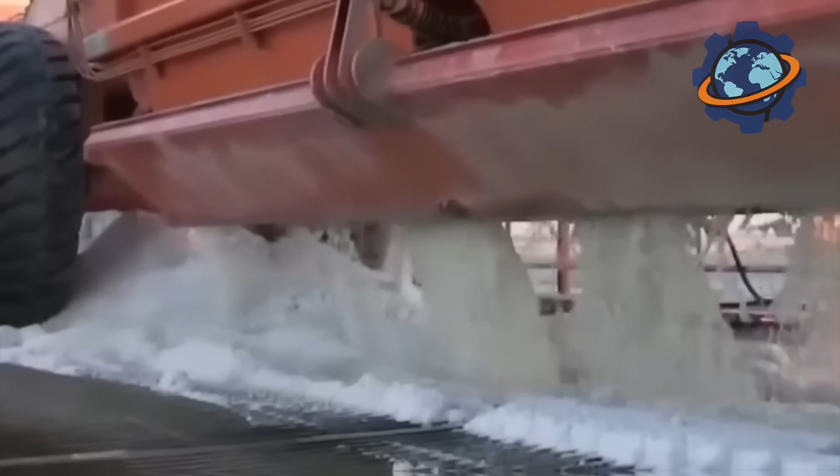So before the main show begins, the brine goes through a thorough purification process. It's passed through a whole series of tanks where chemicals are used to precipitate and filter out all the impurities. What comes out is a perfectly clean, clear, and very salty solution, ready for the main event, electrolysis.

Now, let's head to the heart of the plant, the so-called cell room. This is a huge loud hall filled with rows of strange enclosed tanks connected by a network of pipes and thick electrical cables. These are the electrolyzers, or cells. This is where all the magic, or more accurately, all the chemistry will happen.

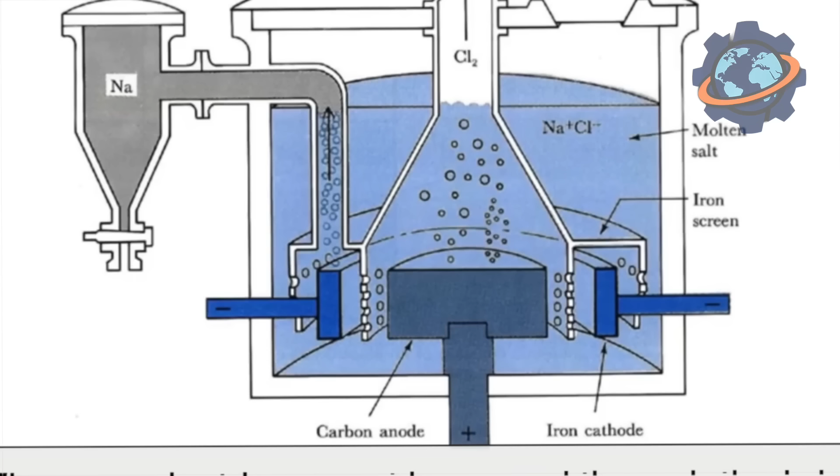Let's imagine one such electrolyzer. Essentially, it's a box into which our pure salt solution is poured. And into this solution, two electrodes are submerged, a positively charged anode and a negatively charged cathode. Now, a direct electric current of colossal power is applied to these electrodes. And this is where the split begins.

The salt molecule in the water breaks down into positively charged sodium ions and negatively charged chloride ions. The electric field forces them to move. The positive sodium ions are drawn, as if by a magnet, to the negative cathode, and the negative chloride ions to the positive anode. And it's at the anode that the whole point of the process occurs. Each chloride ion that sticks to the anode gives up its extra electron.

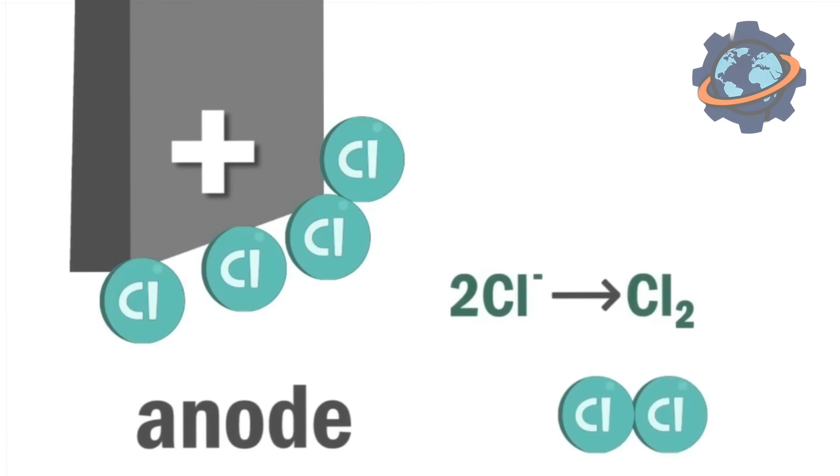Two such chlorine atoms, having lost their charge, immediately pair up, forming a molecule of chlorine gas. Billions of these molecules gather, and tiny bubbles of a greenish-yellow gas begin to appear on the surface of the anode. This is our chlorine.

The main resource for chlorine production is electricity. The chlor-alkali industry is one of the largest consumers of electricity in the entire US manufacturing sector. To produce 1 ton of chlorine, it takes about 2,500 kilowatt hours of electricity. Now, multiply that by 12 million tons a year.

It turns out that this industry consumes about 30 billion kilowatt hours annually. That's more than the annual electricity consumption of entire states, like Vermont or Wyoming. It's like an entire city of 1 million people, working year-round just to split salt molecules. But what's happening at the cathode? The sodium ions have drifted over there.

But they don't turn into metallic sodium. Instead, the electric current splits the water molecules in the solution into hydrogen and hydroxide ions. Bubbles of pure hydrogen are released at the cathode. That's our first byproduct. And the hydroxide ions left in the solution combine with our sodium ions to form sodium hydroxide, or caustic soda. This is our second, incredibly valuable byproduct.

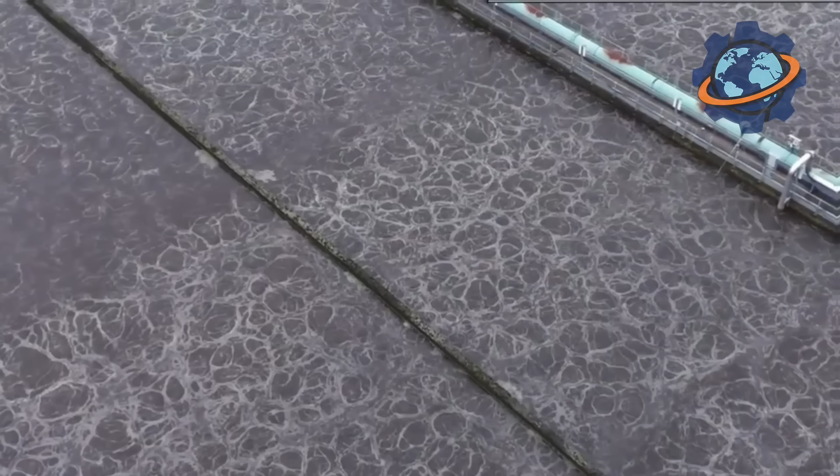But here, a huge problem arises. We've just created three substances: chlorine, hydrogen, and caustic soda, and they must never be allowed to mix. Chlorine and hydrogen together form an explosive mixture, and chlorine and caustic soda react to form bleach, which is not what we want at all.

So, the genius of the technology lies in separating these three products at the very moment of their birth. This is done using special membranes or diaphragms. Imagine a thin, paper-like, but very clever partition standing between the anode and the cathode. This membrane, made of a special polymer, is like a bouncer at a nightclub.

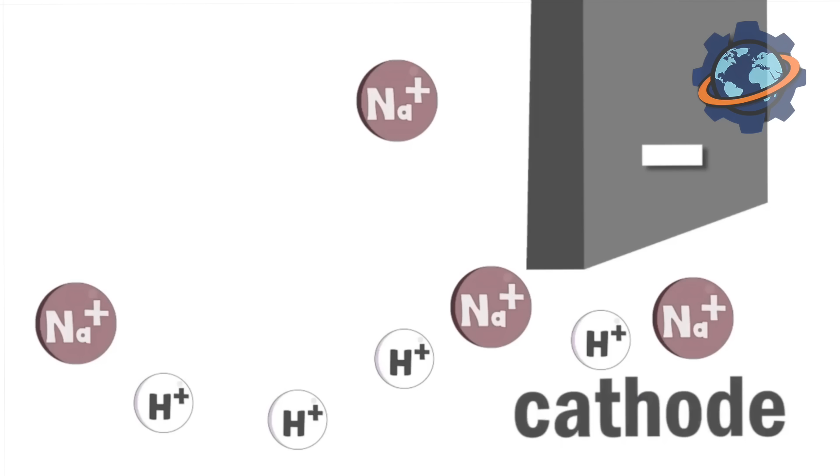It allows the positive sodium ions to pass through to the cathode, but blocks the negative chloride ions, preventing them from getting into the cathode space. This way, chlorine is born and collected in one part of the cell, while hydrogen and caustic soda are in another. Now we need to collect our harvest.

The moist, hot, greenish-yellow gas is continuously pumped out of the anode chamber. First, it needs to be cooled. It's passed through heat exchangers where it gives off its heat. Then, it needs to be dried. Chlorine is incredibly aggressive, especially when wet. It corrodes almost everything. But there's one substance it doesn't touch: concentrated sulfuric acid.

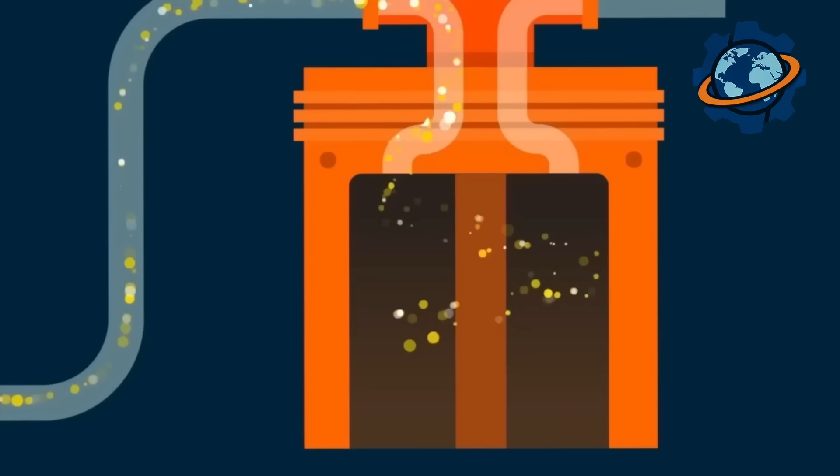So, the wet chlorine is passed through towers where it bubbles through sulfuric acid, which, like a sponge, absorbs all the water from it. The resulting dry, cool, but still gaseous chlorine is ready for the next stage: liquefaction. It's compressed under enormous pressure and cooled at the same time. Under this double whammy, the gas turns into a clear, amber-yellow liquid that looks like oil.

This liquid chlorine is much easier to transport and store. It's poured into special thick-walled steel tankers, or rail cars. Every step of this process is carried out under completely sealed conditions, because a leak of this gas is deadly. And what about our byproducts? They are no less important.

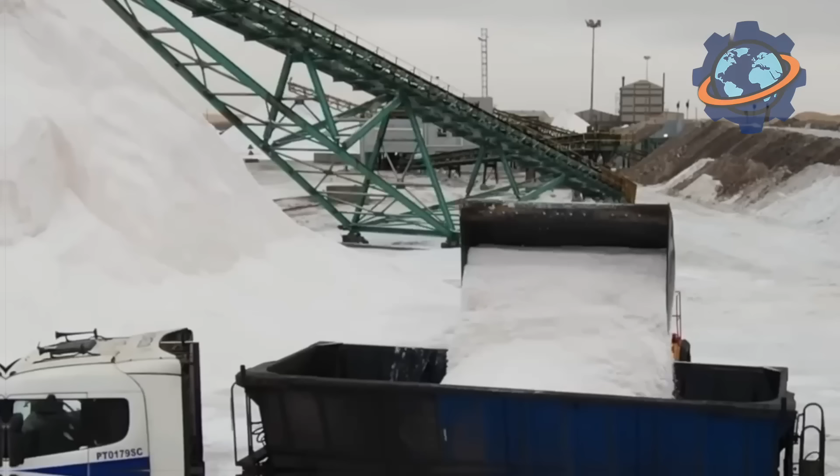The hydrogen we've produced is collected, purified, and used either as fuel for the plant itself, or sold for ammonia production, or in the food industry. And the resulting caustic soda solution is pumped out, concentrated by evaporating the excess water, and sold. It's one of the most important products in the chemical industry, used to make soap, paper, aluminium, and much more.

And so, from simple salt water, by passing a huge amount of electricity through it, we learn to obtain three extremely important substances at once, which form the foundation for thousands of other products that surround us in our daily lives. Now let's see where all this enormous amount of chlorine goes.

You might think it all goes into disinfecting swimming pools, but that's just a drop in the ocean. In fact, less than 5% of all chlorine is used for water disinfection. So where does the other 95% go? It's a key building block for other products. About 40% of all chlorine goes into the production of this universal plastic. The vinyl windows in your house, water pipes, medical IV drips, vinyl records, the credit card in your wallet, all of these were born thanks to chlorine.

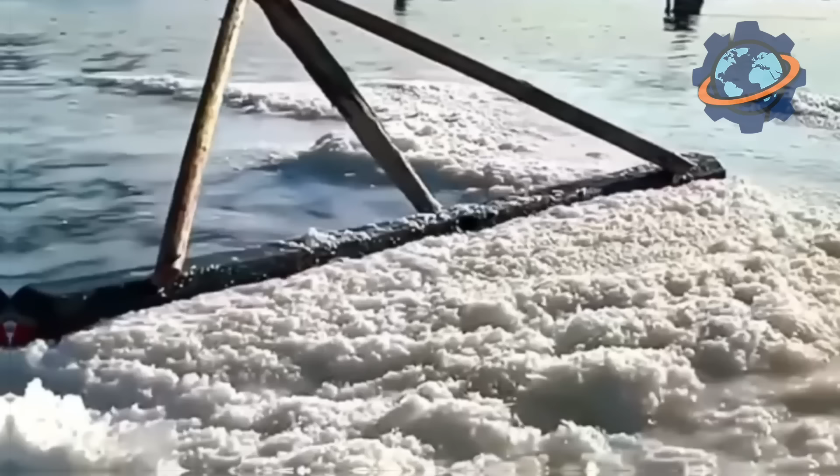Another 40% or so is used to create thousands of other organic and inorganic compounds. Pharmaceuticals, solvents, refrigerants, herbicides, insecticides. The list is endless. Chlorine is also a key component for bleaching paper, giving it that clean white color. And finally, about the byproducts, which are actually no less important.

We remember that for every ton of chlorine, we get about 1.1 tons of caustic soda. This means that American industry produces over 13 million tons of this vital alkali annually. This makes chlor-alkali production a perfectly balanced business. When the demand for one product falls, the demand for the other can rise, allowing plants to operate stably.

So these millions of tons are not just statistics. They are proof that this sharp, suffocating gas is the invisible foundation for a huge part of the American economy. From the plastic pipes under our streets to the medicines in our pharmacies.